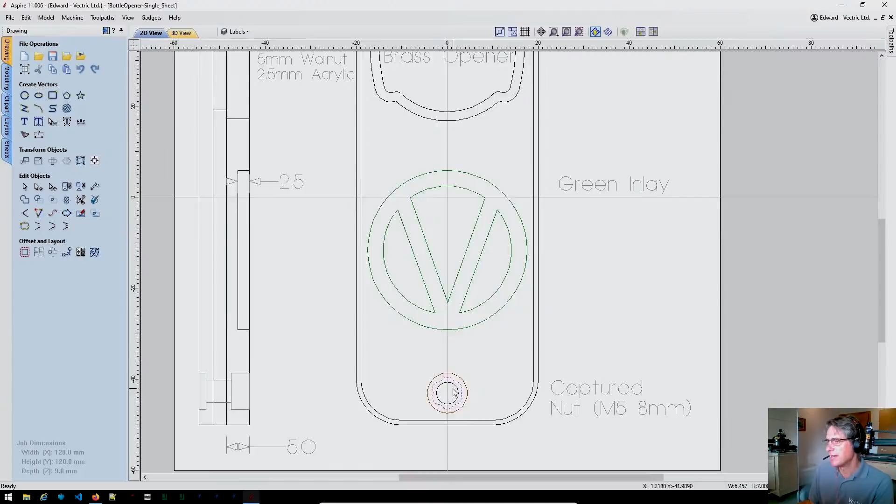The first thing is I've got these profiles here that are filleted versions of the nut geometry, so that there will be a captured nut to fix the 2 layers of wood to the brass inlay, brass insert, I should say. And I can see already that the height of these is 7mm, but on the notes here it says they should be 8mm. Now these are kind of unusual shapes, and I want to resize them all together.

This used to be quite awkward if we used the resizing in the previous version of the software, and you try to resize a group. They would resize around the center of the group. So you can see here that as I select multiple objects, we put a bounding box around all of the selection, not just the individual objects, and they have their own center of rotation, etc., etc.

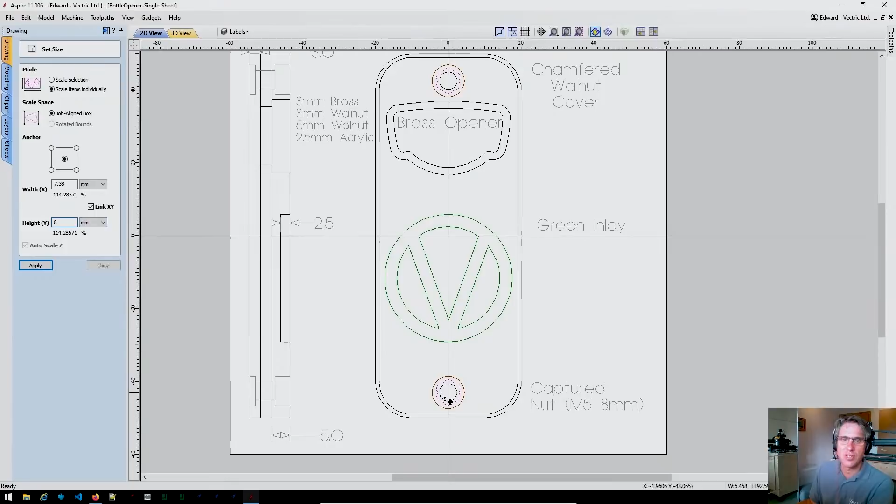So now what we can do is actually ask it to scale the items individually with this setting here. And this forces the software to do the scaling. So in this case, I'm going to increase the height from 7mm to 8mm, but it will do it for each object in the selection individually. So what you should see is that they will stay in place, which is the important thing.

So that allows you to resize selections of objects all over your design simultaneously, but without changing their position, which used to be really difficult to do previously. So it's a small thing, but quite nice. Another small thing that's very nice is I want to change the name of this green inlay to describe actually that's going to be acrylic.

Okay, so I'm just going to edit the text box here, and start typing acrylic. Now I'm a bit of a terrible speller, so I'm not quite sure how to spell acrylic, and you can see here now that we've got the classic red underlining that you should be familiar with from lots of software, because we've added spell checking. And you can see here that it's either sacro-iliac that I'm after or acrylic, so I can now select that.

It supports multiple languages and should work in the usual way. So you'll see the underlining in text whenever there's a potential spelling error. So hopefully that will solve a lot of problems for those of you out there like me who are a little bit challenged on the spelling.

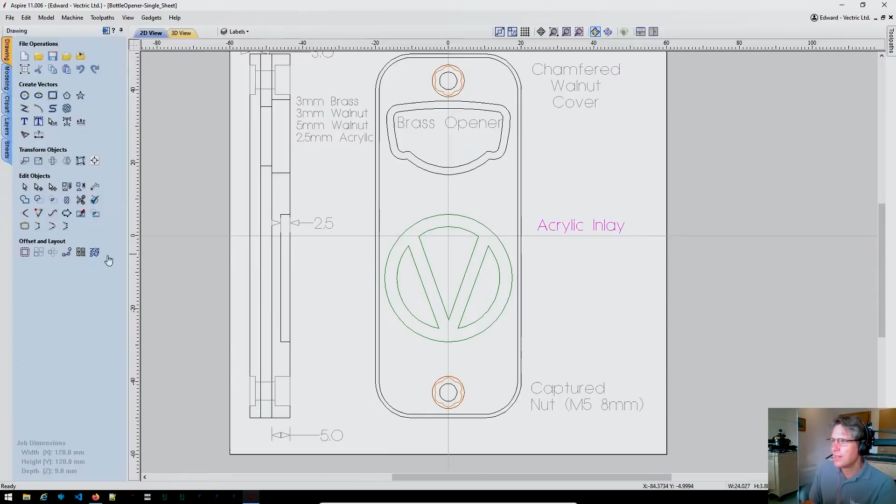The next, again, very simple thing, but really handy just to point out. So I'm going to drop in a little hand-drawn arrow here. And as I start to draw, I come across, and I want to put a line in here. But actually, that's not right. I can use the backspace key.

So when I press the backspace key now, I can go back through my line drawing, a line at a time, to get back to where I need to be. I can even go right back to the beginning of this line drawing. And that will allow me to put in the correct thing that I want to do. So the backspace key just allows you to effectively step back through a freehand line drawing. It's very handy, a small but significant improvement.

Okay, so there's a couple of little quick new things which I hope are all adding to a smoother experience. But the big problem with this file, when we actually look at it, is trying to describe this moderately complicated part in the previous versions of the software involved quite a lot of head scratching, and our main organizational technique was layers. And you can see here that this file has got a lot of layers.

Some of the layers here are automatically generated. This is probably a common thing for those of you who ever import DXF. You will often see that layers come in that are empty because the DXF file generates a layer automatically, whether it's got content on or not. And if you import that DXF into the file, you'll often get dozens of these empty layers, which you have no interest in.

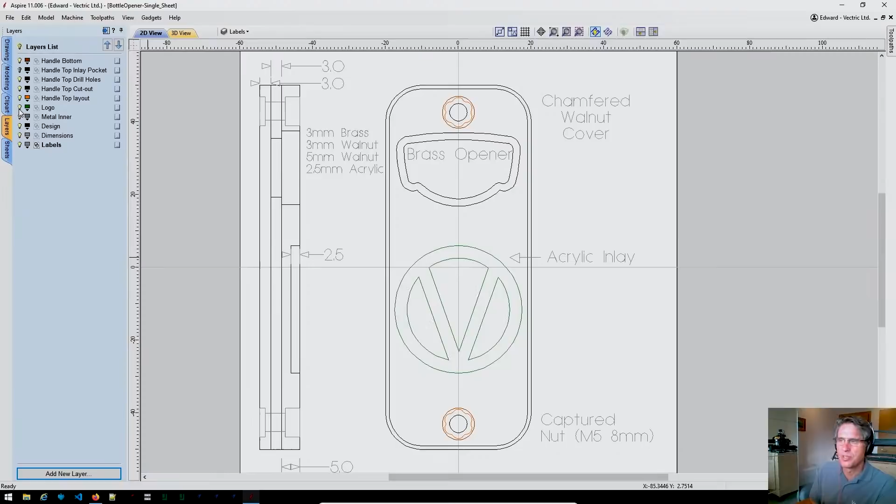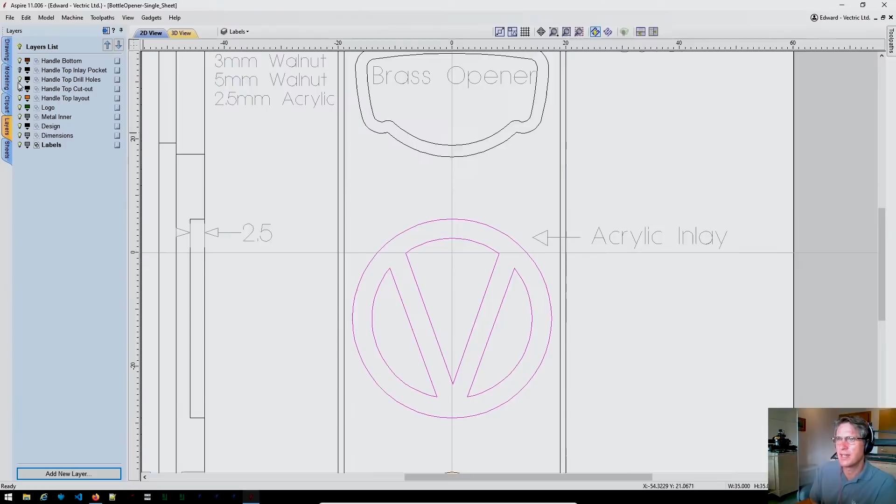We're using them to represent design elements, which we want to keep colored, for example, or independent. But we also need to create layers that hold things like the artwork related to the actual machining. In this case, we've got a filleted version, which is going to form the actual pocket and the actual inlay that we cut. They have to be represented in their own layers, and the whole thing gets quite complicated. So we've got layers that represent machining things, layers that represent design things, and some layers that are just there for structural purposes.

This is really common, because as soon as you have a part that's got to be manufactured from multiple materials, you need to organize your artwork somehow, and that's the only way we've had to do it. But let me now go across to the new version of software, where we have really extended the existing concepts of sheets, which did exist in the context of nesting, taking another whole chunk of organizational infrastructure and expanding it to make it much more useful. Hopefully I can show you that in this next file. So I'll close this one down. Don't need to save it.

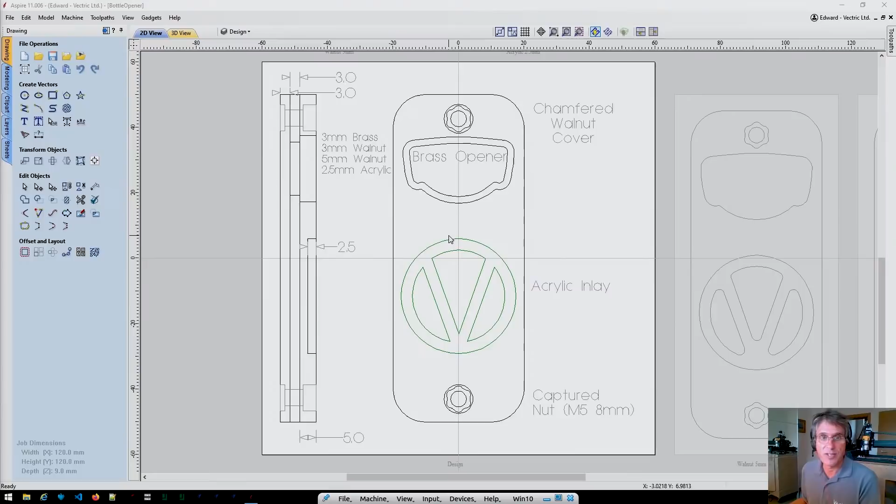Okay, so I have got the new file up here, which started as the same file from 10.5, but now I've restructured and rebuilt it to make use of the new features in 11. In particular, we're going to take a good look at how we can now deal with different materials using the extensions we've made to the Sheets feature. First thing to note is the design space is basically the same. I've kept a place here to do all my design, but over here on the left, you'll see we now have a Sheets tab.

If I zoom out a little bit in the 2D view, you can see that I have been able to create, alongside the design space, actual work areas that represent the true pieces of material from which I'm going to cut the final parts of this job. As we discussed earlier, there's some 2.5mm acrylic, which has got the inlay in it. On the top surface, we're going to use slightly thicker wood so we can drop the inlay into a pocket there. Then we've got the brass inner, which forms the actual mechanically strong part of the bottle opener.

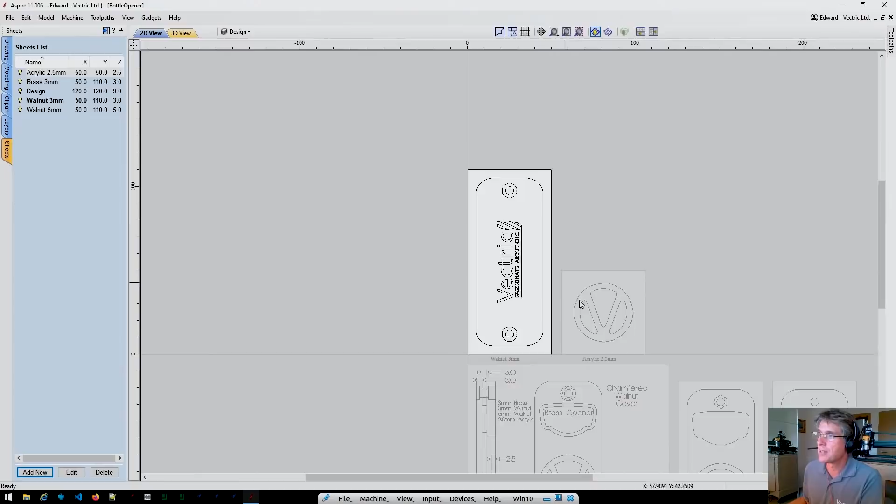And then on the back, it's also another piece of wood, but I've also dropped in a little decorative logo here, which we'll show you in a second, that I'm going to use to laser engrave the back as well. So that's the basic structure of the file now that we can use sheets, right?

So we can break out those things that we had to store as overlapping and fairly complicated layers of data. Anything that specifically now relates to the brass bit, I can move on to the brass sheet. So the cutout passes and things related to that, and the vectors in general that are associated with the mechanics of machining this part as opposed to the design phase can all live on the appropriate part of the file for manufacturing as opposed to design.

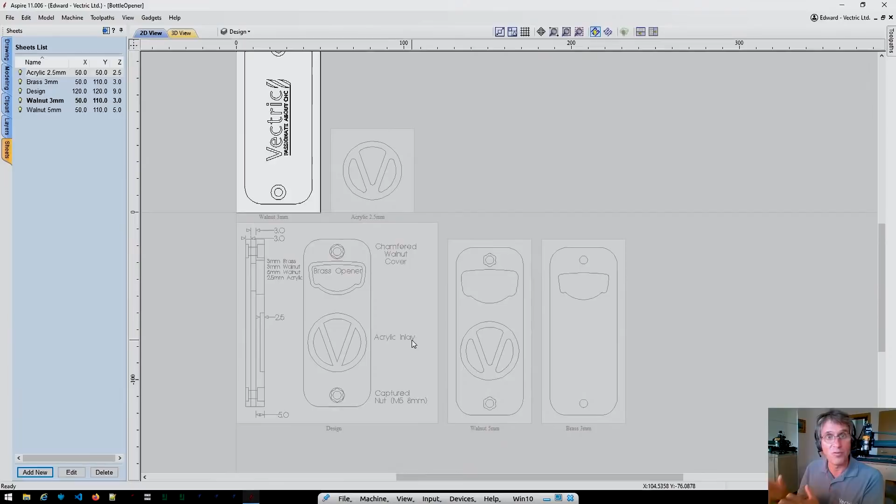One thing as well that's worth pointing out is if I select these sheets, we can move around the sheets fairly easily. We've got various options. I'll show you on the Toolpath selector in a minute that you can do sheet selection from there as well. But basically you can double click anything in the sheets list and that becomes the active sheet, and the active sheet is the white one with the others around it.

You can also just double click in the 2D view to move around your sheets selection, and obviously you can add and edit them from this list here at any point. If we just pick the design one, for example, and I click edit, you can see the settings are fairly familiar for anyone who's used our software before, because it's broadly the set of stuff that used to be associated with the job. But now the job can involve several types of material.

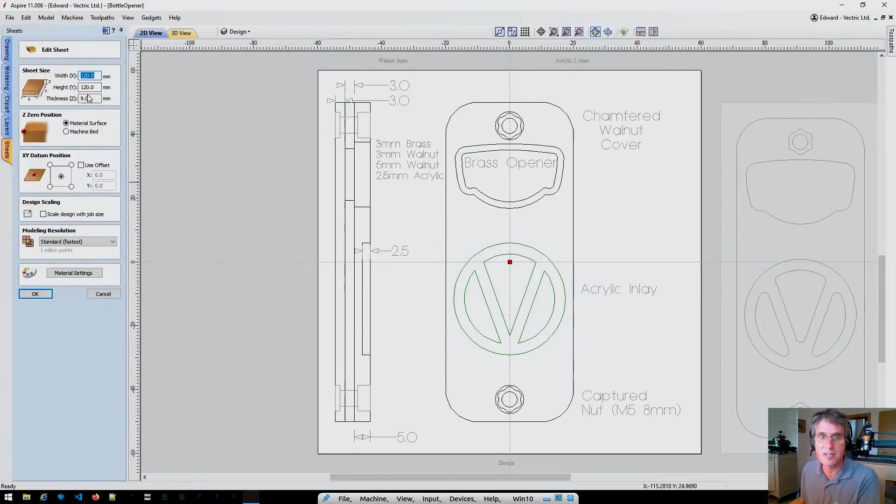So you can see that we can set not only the dimensions here, but also the datum position, and that's significant for a couple of reasons. Most immediately useful, I think, is that when you do have a design space that's separate from your manufacturing space and you're designing something which is essentially symmetrical, you'll often notice that we set the origin in the middle. And this is because it's much easier to design around a central location. You can mirror things left and right, top and bottom, and it's kind of easier to see the balanced layout if you do it around a centered origin.

But this is almost never right for machining, so generally speaking, especially if we're going to do multi-material parts like this, we're going to want to minimize material wastage. We're going to want to tuck the part in the bottom, say, corner of our piece of material, and trying to know the dimensions of the design from a central origin and find that on your machine and make sure you don't run over the edges is more complicated usually than you need. I mean, it might not be the case for a single sign, but for lots of cases, you kind of want your datum to be somewhere from which everything will be up and to the right, say.

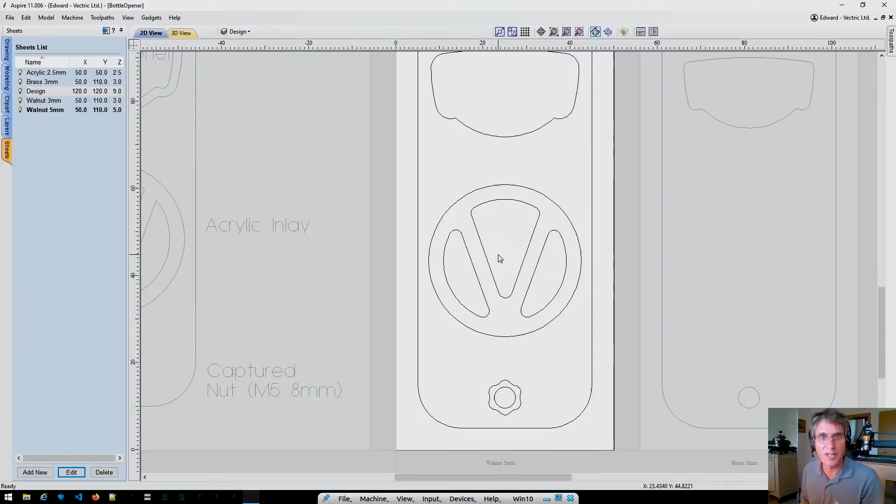And this is now pretty straightforward because our design space can have the origin in the middle, but each of our parts can have its own datum that can be in a completely different location. So here I've moved to the first piece of wood, and you can see the datum for the wood, 0,0, is actually the bottom left corner. And this means that any toolpaths I create on this sheet will be relative to a datum in the bottom left corner. Each sheet can have its own datum, so this gives you a lot of flexibility within one file to handle those complexities of how you want to actually manufacture this part in practice.

Okay, so that's a quick whiz round. So you can see basically the sheets here. Let's now go across and look at the toolpath and see what that can do for us. I'm going to pin those out because we're going to be in there a little bit for the next few minutes. And I also want to show you the layer structure that I've been able to replace the previous file with, and hopefully you can see that it's a lot simpler. So I've really only got a few layers now, the design and logo and labels. So in other words, I've got layers relating to the design elements.

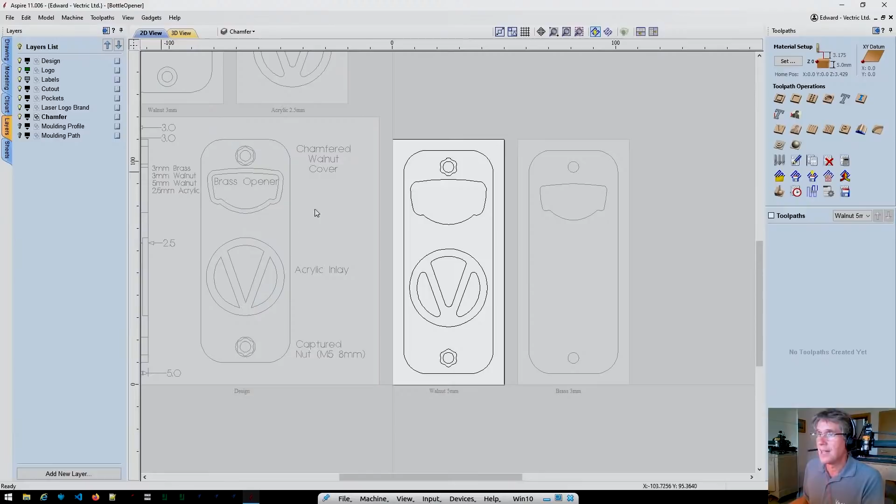And then I've got a series of layers here, cutouts, pockets, the laser brand, and a chamfer, which are all layers where the artwork relates to a particular toolpath strategy that I'm going to apply. Now notice, if I just zoom out so you can see all of the sheets here, and I just turn off the chamfer for a second. Must remember to turn that on again in a minute.

But if I toggle off the cutouts here, you can see that the cutout layer contains artwork on more than one sheet. Okay, so the sheets and layers are completely independent of one another in the latest version of the software. So each sheet can have content from layers. The way I think about this is imagine it's a table laid out where the rows are your sheets and the columns are your layers, and so you can put stuff in any box in that table.

So in other words, some sheets can have content from one or more layers, or no content from that layer, and that allows you to do this process I'm doing here, where we can take all of the geometry associated with the final cutout and have some data on every sheet that's also associated with that layer. Why do you want to do that? Well, if I just turn back on the chamfers as well, it means that I can use the power of the Toolpath templates much more efficiently now for multi-material parts like this.

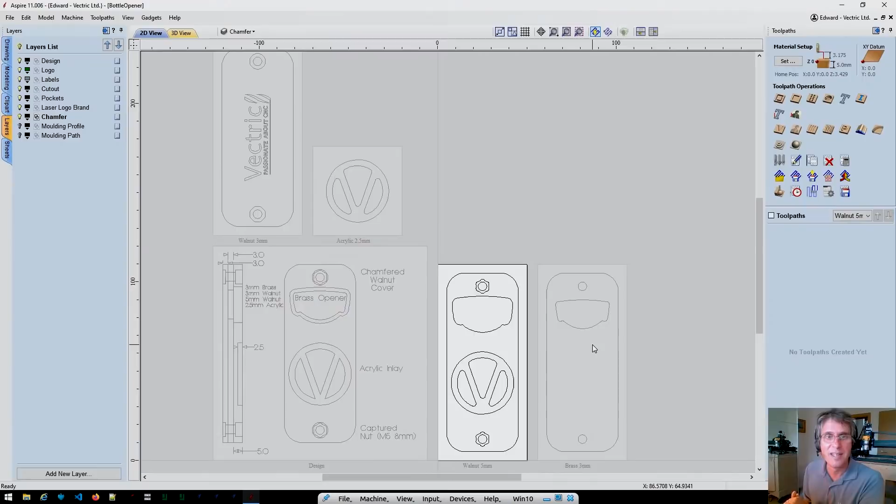If you recall, and hopefully you've had a go with this at various points when you've been using the software, you can create a Toolpath template simply by associating typically the Toolpath strategy with a named layer of geometry. So instead of selecting the thing you want to cut out, you say cut out anything that you find that's on a layer called cutout. And then you can save that and reload it in at any time into a completely new file. And as long as that file has geometry on a layer called cutout, you can calculate that toolpath against it.

And it means all the settings for a particular strategy that you use frequently can be created once and applied across lots and lots of different designs. So that's what I've done here. I'm just going to load in my example, and I've got one here called Pocket, Chamfer and Cut, which does pretty much what it says on the tin. So what it's done there very rapidly is it's gone across each of my sheets. It's looked for each of the toolpath strategies in that file for geometry on that sheet that's on the layer it needs for that particular toolpath strategy, and then it's just applied the toolpath if it can.

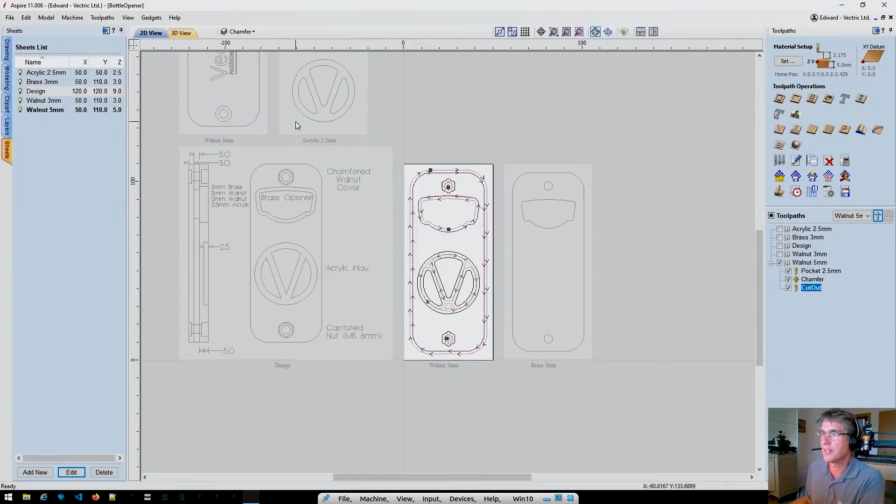You can see that up here we've got a separate selection for sheets, but this just maps all the others. So just for clarity here, you can see as I double click the acrylic, it changes to acrylic up in the list here, and it also changes to acrylic on this drop down. Okay, so these are all in sync. The 2D view, the drop down in the toolpath list, and the sheet list, they're all the same, right? There's just an active sheet at any one moment in time.

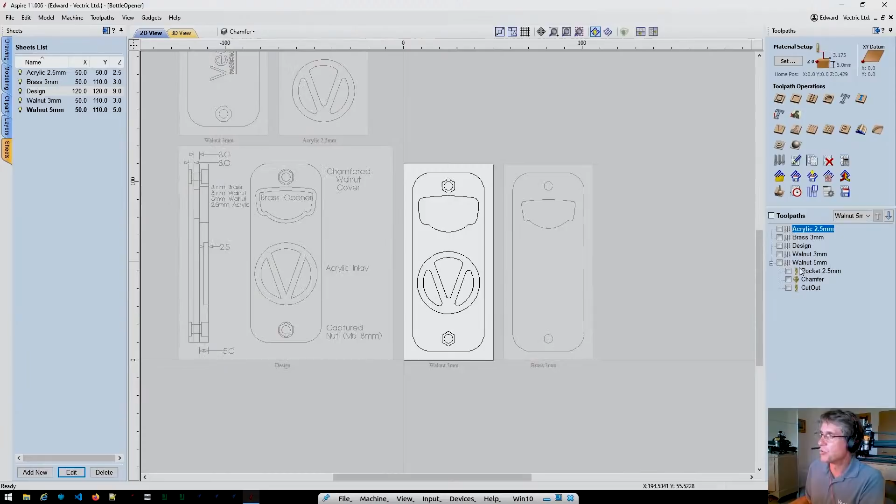What can cause you a bit of confusion is we also have some groups in here. So we put the toolpaths in groups, which you may or may not want to do. The groups themselves don't swap around, but the content will come and go as we look at our design. So let's start, if we go into the preview here, I'm just going to preview this first piece of the job, which is the top layer, which is probably the most complicated single part.

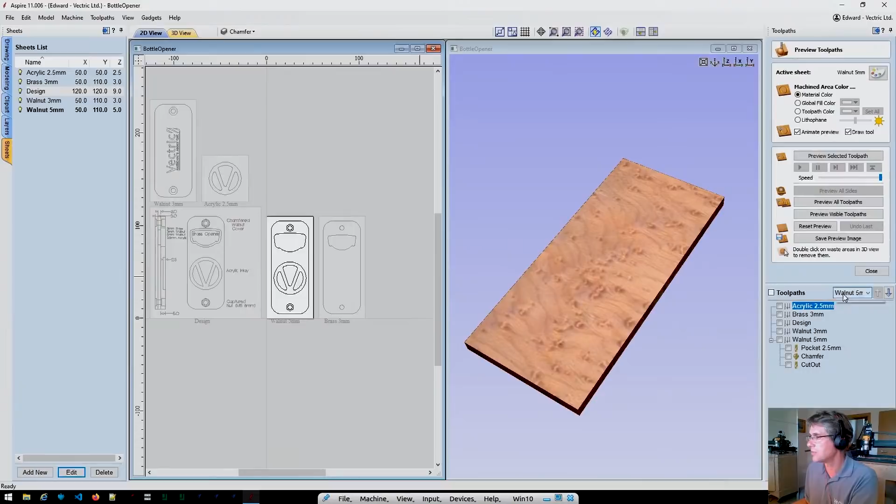Notice that because we've got this in sheets mode now, and in fact, if I page up, this might make life a bit easier for you to see exactly what's going on. This will reflect whatever I've selected in here. So similarly, I can select from here, as we discussed. They're all the same, in sync with one another.

Okay, and when I click preview all toolpaths now, it will actually be all the toolpaths for the selected active sheet. So it's kind of convenient, you can just whiz through all of the toolpaths for that sheet. So remember, all these came in one go. And the reason they came in is because, like I said, the layers here are now providing the artwork for those templates to work relatively automatically from this point on.

And it means I could do a whole series of designs as long as the artwork was on the right layers. These templates would apply. So that's the first thing. While I'm in this, I'm going to just mention one thing about the pocket. This is quite a trivial pocket because it's just for this rather thin inlay. And so I'm only actually using one tool.

But one of the other things that's occurred in version 11 is that we have made the efficiency of rest machining pockets much better. So with quite a bit of analysis and going back to some fairly first principles again, our lead developer on this, Mark, has been able to leverage some really significant improvements in minimizing what the finest tool has to do, if that makes sense.

So we're able to carve more than previously we thought possible by adjusting the strategy a little bit with the bigger and bigger tools. And so what you should find is some fairly significant speed ups in non-trivial examples. So this is obviously quite a simple one, but when you're doing a more sophisticated pocket with 3 or 4 tools, what you should see in 11 is a fairly significant speed up in that case. So I just wanted to mention that.

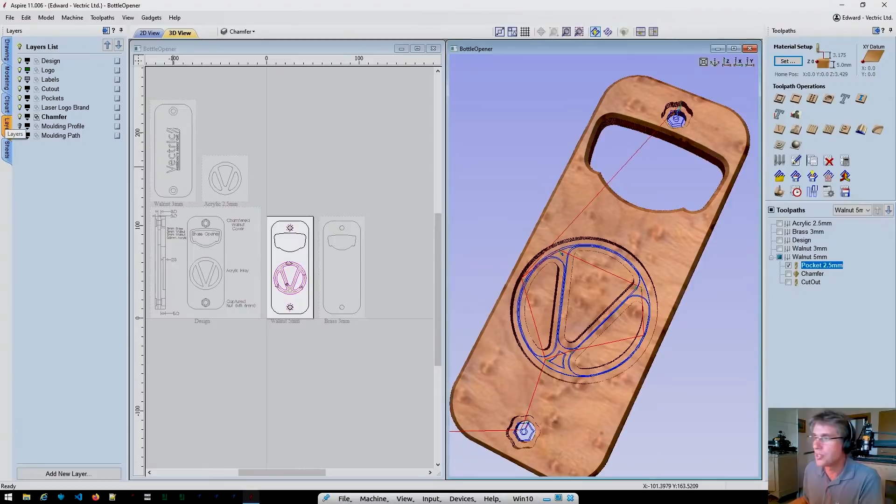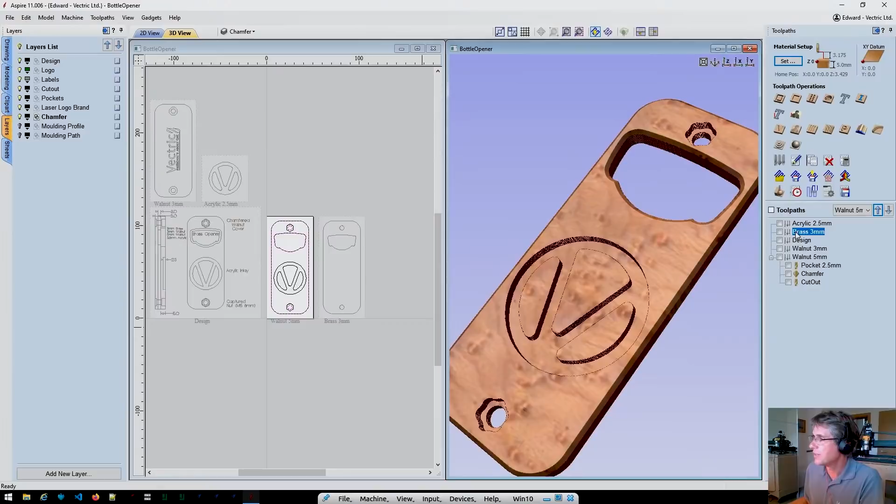What I also want to show you is very quickly now that although we've picked up our toolpath template, okay, so when I come in here, I can see that it's found. So yeah, we'll take this cutout pass here. It's found for a hard wood here that it's going to take 2 passes, and for the thinner brass, in fact, if I move across to the brass and we actually play that one out, you'll see that it's actually still only doing 1 pass through the brass.

Now the reason for that is quite simply that it is using whatever values were associated with the toolpath template. Okay, and the toolpath template only has one set of values for this tool geometry. But you may have already noticed that our tool database has added the ability for us to associate different feeds and speeds to the same tool, relating to different material types.

So in other words, I've used the 1/8 end mill in all of these examples, but the feeds and speeds are not going to be sensibly the same for hardwood or acrylic or brass, right? So how do we fix that problem? Well, what we can do now is we can notice, for example, here that there's going to be one pass through the end mill in acrylic, and that's because it's picked up the hardwood settings that I used to make the template.

And I have to apologize straight away now, because although I'm using Imperial tools, which will be pleasing to some of you, I still really struggle to imagine speeds in inches per minute, which seems to be the default for most people in the CNC world. But I can't imagine what 4 inches per minute looks like in terms of practical movement. So all of my feeds and speeds, I'm afraid, are in millimeters a second, because I can imagine what 1 centimeter a second looks like. Sorry about that. So yes, we've got a weird mismatch.

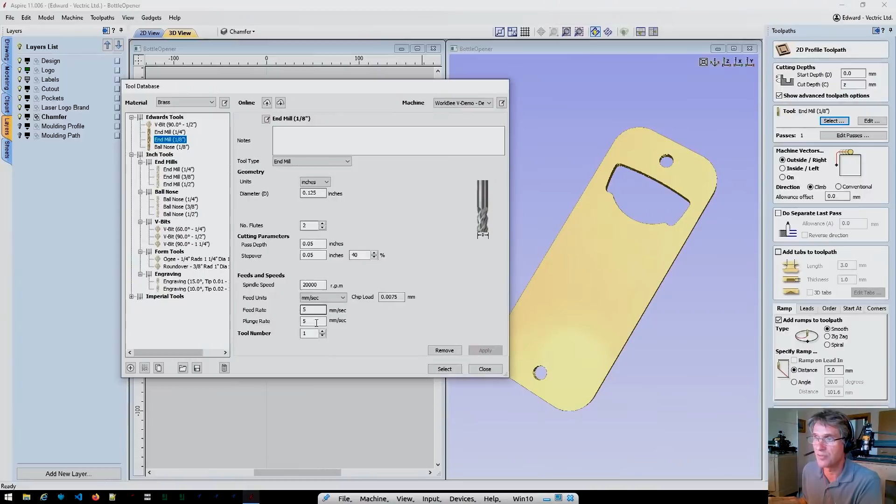And as I select the brass settings, you can see it's halved the plunge and feed rates, and it's also dramatically reduced the pass depth. So I can select that and apply that, and now you can see we've got plenty more passes down. We've also got some ramping in here, which is probably more appropriate as well. So although it's not directly linked to the material that I've described in my sheet, it's much easier for me now manually to match correctly the feeds and speeds that I think are appropriate for this particular part. Okay.

So again, you can do that for the acrylic too. I've created acrylic settings, which will be somewhere in the middle of the brass and the hardwood cutting. Okay, so that's the basics of using the sheets alongside some Toolpath templates.

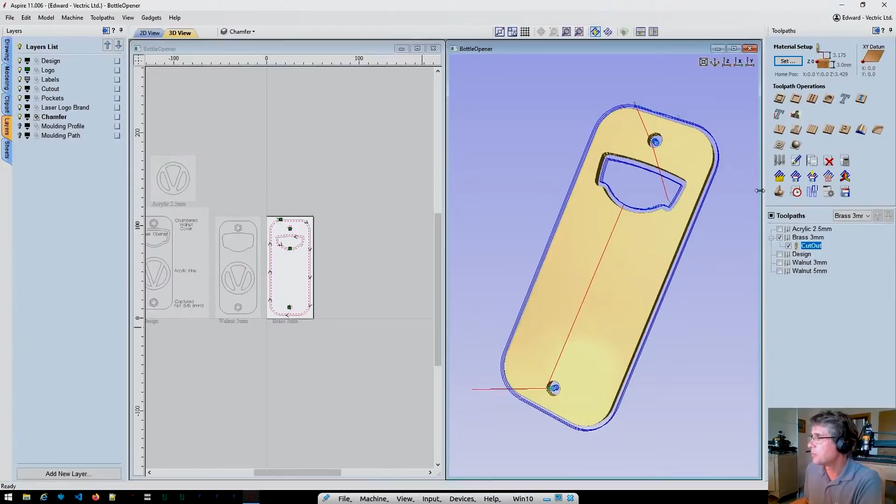I do want to just show you as well one other small change in one specific Toolpath strategy that we've got here. Previously, if I just go back to our walnut top surface, which is the 5mm one here, and we turn that on, what I've got at the moment is a little chamfer toolpath going on here, just to take the edges off. So you probably saw as we were doing this that we come round and finish off the edges of our part here with a nice chamfered edge, just using a V-bit tool.

But let's say I want to do something a little bit more curved, okay, then I can use a ball nose, and we can use the old molding toolpath. So hopefully you've come across molding toolpath. It's been in for a couple of versions now. But previously it was quite difficult to use with a toolpath template. And the reason was, if we look at that toolpath strategy, it requires 2 sorts of vector.

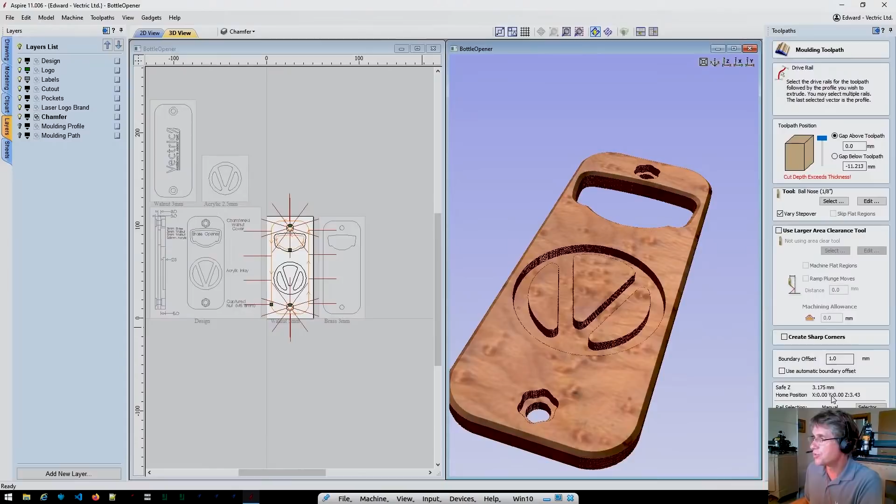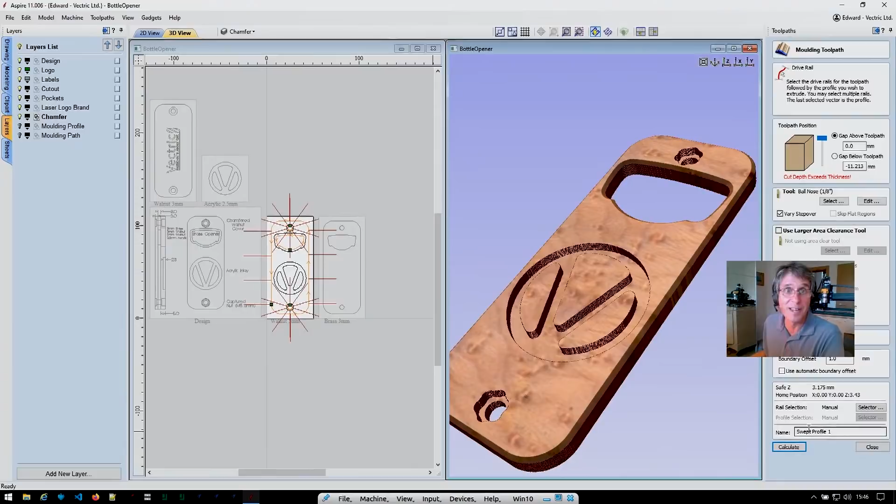It requires a vector for the boundary itself, and if I just move my video out of the way here, you can see at the bottom, it also requires us to choose both the rail, in other words, the boundary that we're going to carve around, and the profile. And that was slightly awkward to do in a Toolpath template, because generally the templates are associated with one vector layer. How do we distinguish between these 2 things? Well, this allows us to select 2 vector layers associated with this strategy.

And what I've got here tucked away on my layers is 2 extra layers, a molding profile and a molding path. So if we just zoom in here and I turn these on, you can see that it's only a little curved profile. But crucially, it's on a layer called molding profile. And then there's a path which is 1mm inside the other one, which is on a layer called molding path. Okay, so the important thing here is that those names match a Toolpath template, which I've previously created.

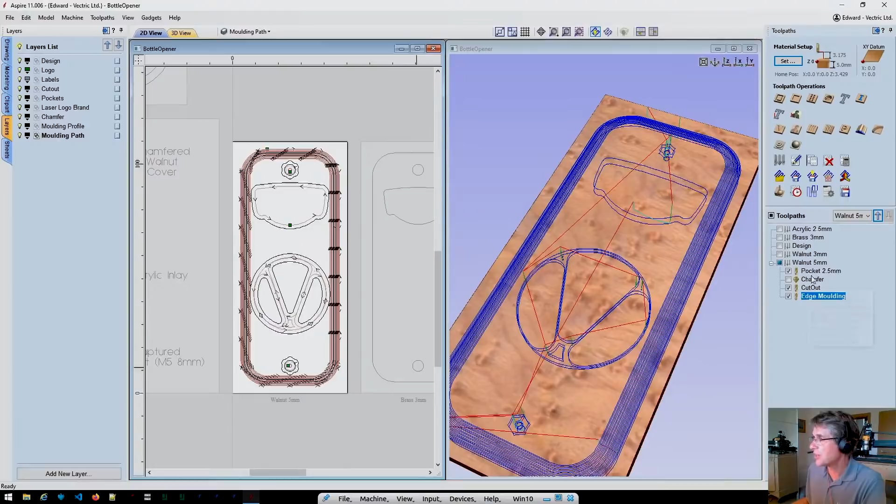So let's open that up, called Edge Molding. And we can apply that. It goes through all the templates, but it only finds the vectors associated with this layer on this particular sheet, right? So it's done that. If we just knock out everything except the chamfer, we don't want to run the chamfer in this case, and I just preview all the visible toolpaths. Now you can see that I've got a little rounded edge on the top surface instead of the V-bit chamfer.

Okay, so the crucial thing here is that with the molding toolpath, we've extended it so that you can use templates with that, just as you would any other toolpath in version 11. And the molding toolpath is very handy because it's the sort of toolpath that you often set up once and want to use broadly the same strategy and the same tool set, but with different profiles, for example. And now you can keep that template handy, and as long as you just put the profile on the same named layer, you can rerun the template, which should improve a lot of things.

Okay, so the last thing on toolpathing directly I want to show you, for those of you using the laser module. The laser module allows us to do hybrid machining. The machine I have behind me, it's a magnetic laser head. So once I've done carving, I can literally just snap magnetically the laser onto the side of that router there, and run over the same material using all the same datums and X, Y, and Z offsets. I can run a laser toolpath completely synchronized with the carving I've just done.

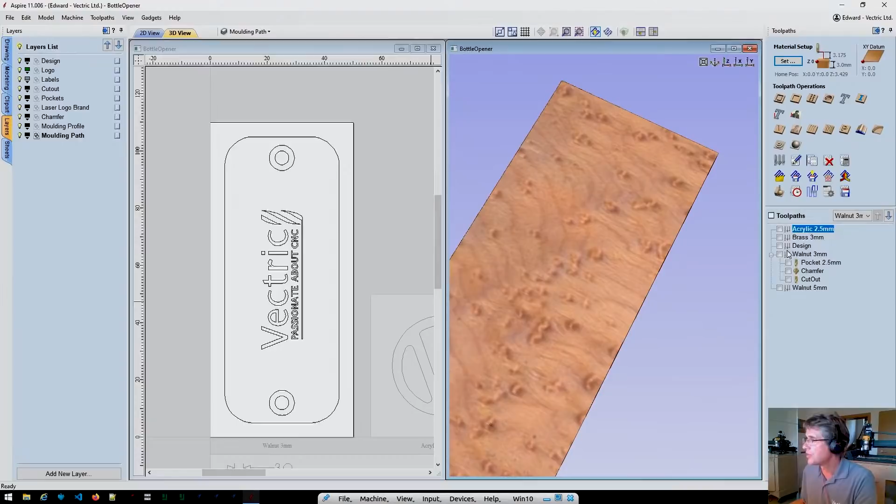So in this case, what I want to do is cut the back of this bottle opener, and then I want to just decorate it with a hatched version of the Vectric logo. So there's been a few changes here. If I just select that and we go into the laser toolpath strategy and I select our vectors here.

Crucially, we were previously just hatch filling individual shapes like this if they were separate. So in other words, it would do the V before the E, and then the C, and then the T, and each one it would do a little tiny hatch and then move the machine. And the reason for this, obviously, is that in CNC world, conventionally with woodcutting, we've always worried about air moves.

So a lot of the last 20 years of my life have been about stopping the machine doing unnecessary plunges, retracts, and air moves, right, and trying to keep the machine cutting as much as possible with a minimum of, if you like, useless middle connections.

With the laser, the world is slightly different, because with the laser, really, what you want to do is get the machine up to speed rastering, and then because there's no plunges or retracts and the laser is instantaneously turned on and off, you just want to keep it moving and just use the laser power settings to make the adjustments, and they're practically instantaneous, so there's no penalty. And in fact, decelerating and accelerating to do individual areas might end up making a much longer toolpath in time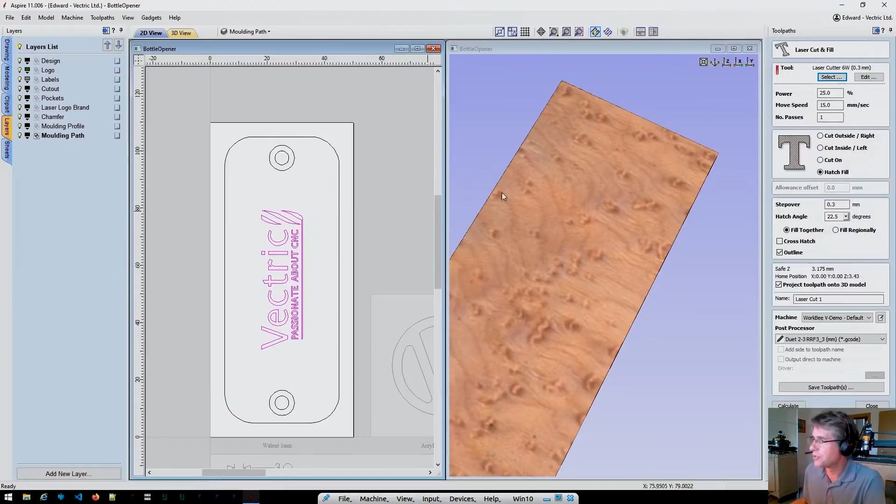than this alternative strategy. So by choosing fill together, I don't need to do anything else, just calculate that, that's it. You can see what we've got here is it rastering constantly, and the purple is laser off and the blue is laser on. And so it just toggles the laser on and off with the minimum number of air moves it needs to finish. There's some more air moves in here because I've also kept outline on, so it comes back and does an outline around the hatching as well, just for good measure.

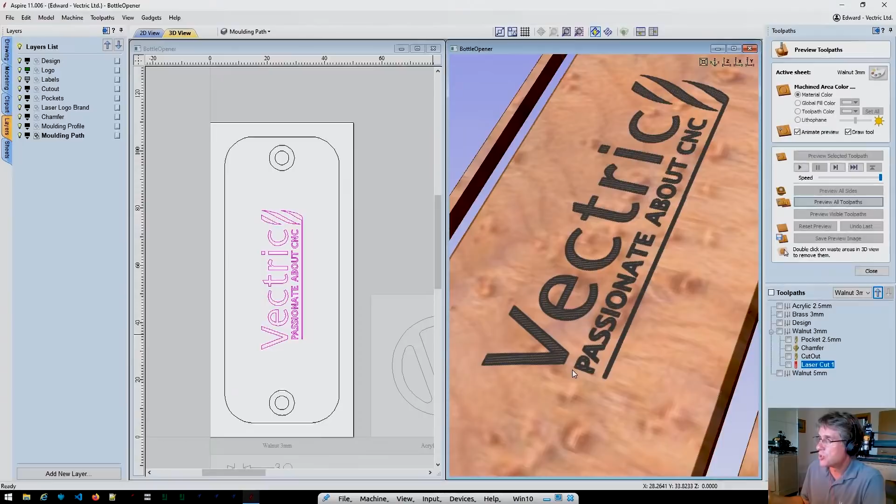In the latest version, we can preview that as well. So I can just reset that, preview all the toolpaths, and then you can see the whole thing. So it's doing a sort of hybrid machining. It's done the cutout, the chamfering, it's dropped in some drill holes, and then it's also added this laser hatch across the top. So we get a really good view of what the finished part is going to look like before we commit. And it's a part obviously made from a hybrid process of machining and lasering over the same material.

So hopefully that's a quick whistle through, and I hope it feels to you like a very coherent set of features which coalesce around doing these slightly more complicated projects. But hopefully also they won't interfere with any of the simple jobs either. So this hopefully makes you keen to try something a little bit more multi-material in the future.

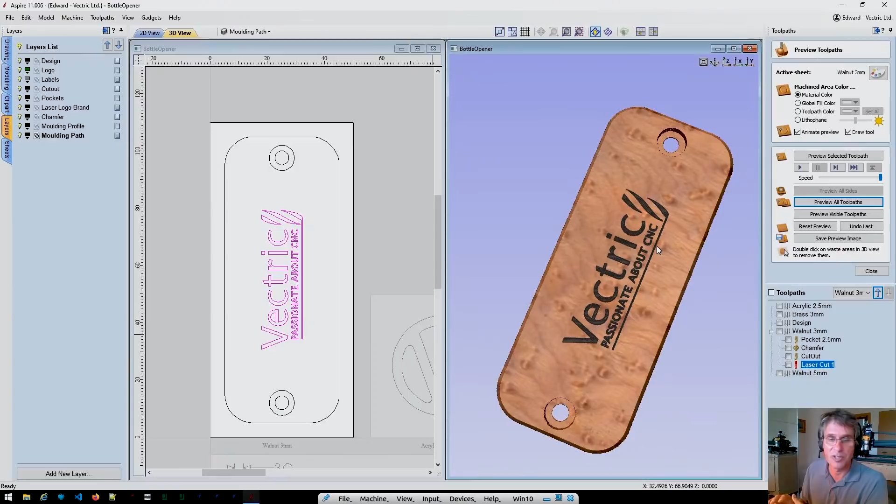So the last thing I want to talk about on this part of the demo before we go to 3D stuff in a second is about machine configuration. Now, the discussions we've had up until now pretty much relate to 2 and 2.5D machining, right? So there's nothing that's not doable in VCarve, and most of what you've seen is doable in Cut 2D, with the exception of some of those decorative toolpath strategies like molding and V-bit carving. But the principles of sheets, the materials in your tool database, and toolpath templates, all those things are in Cut 2D as well. Okay.

And the final thing I want to talk about is machine descriptions. So another big change we've made for 11 is to try and help you manage your machine configurations a little bit more easily. And there's two parts to that. One is, as a new customer, or if you buy a new machine, you should be able to find your machine already defined by us. So there's various ways to look for a machine if you're new to the software. One is to just install one of our offline packages, which you'll be able to download from the portal.

We offer the package download for those people whose machining PC is not connected to the internet, which is entirely sensible, and plenty of you out there are doing it. And so we always bear in mind that our software always works in isolation from the internet if needs be, right? But if you do have an internet connection, obviously we can make things more convenient. We just never make it impossible to use without an internet connection.

But the most convenient way is simply to search your machine online if you've got an internet connection, and you can just pick it and it will come down. When you bring that machine down, we'll also bring in some associated feeds and speeds for the tool database, which broadly match the capabilities of a machine of that type. And off you go, basically. Now, if you've got a custom machine, you can simply add one completely fresh using this button.

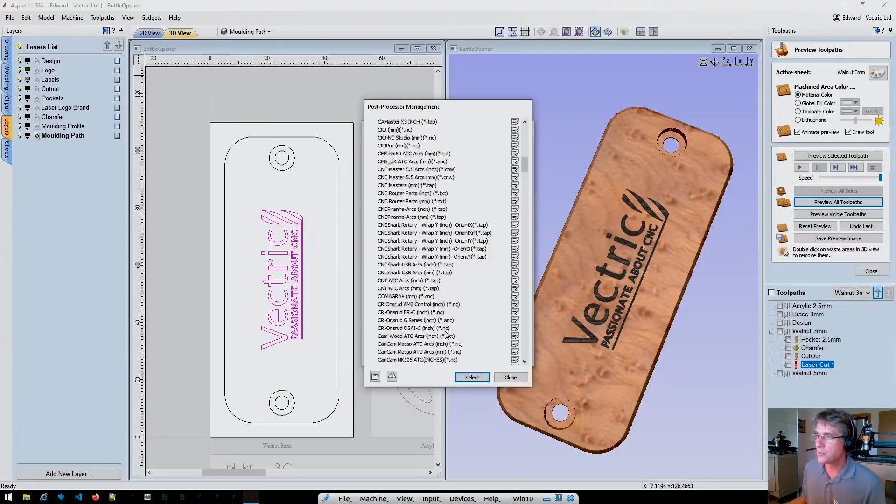For the rest of you, though, you can take any existing post that we have here, and you can customize it. And when you do, you'll get a copy up here for you to edit. And when you want to edit it, you can just get in here. You can open the file location and just edit it with any normal text editor. However, if you want to use one of our posts, there's a little bonus in there, which is that we can keep it up to date for you if there are changes that are appropriate.

So I'm just going to press G. Let's open up. I'm going to add the default G code post to my machine configuration here, and you'll notice here that it's also saying latest but V2.

And that's because we've had some changes to the default G-code post. There's a version 1 and a version 2. If you like, you can just leave it at latest, and that means that whenever we update this post and we're confident that the changes that we've done are tested and safe, you will inherit those changes whenever you synchronize with the cloud up here or with your post processors list.

You don't have to do that, and we understand that in a manufacturing environment, when it works, you don't want to change it, and that is fine, and we've tried very hard to ensure that we never interfere with that. In principle. So if you feel like that, then you can choose here a very specific version, and if you choose that version, we'll never update it. Okay, so you can fix it to a version and leave it there.

All right. So that's a very quick overview. We're going to do much more discussions about post processors, etc., in due course, but that's a quick overview of it. And I think that's it. So this is the sort of the 2D thing. I'm going to open another file now, and we're going to look in a lot more detail about the 3D changes that we've made, which are Aspire specific.

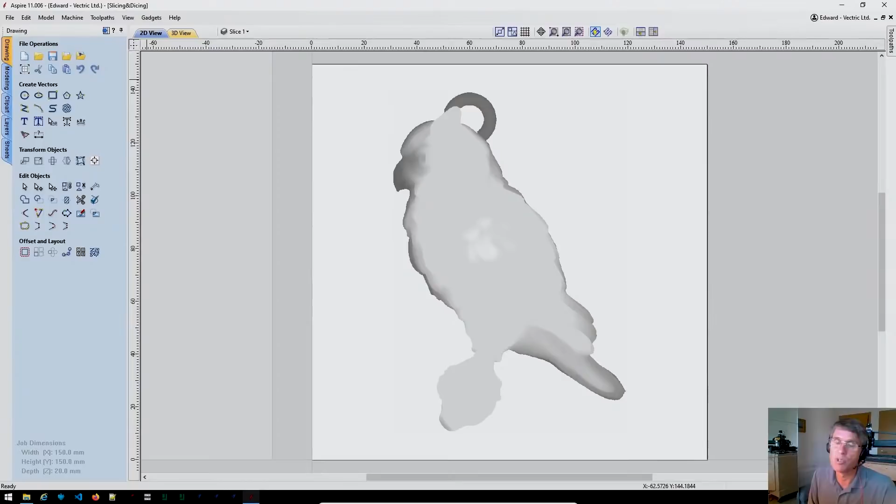Okay, so I've opened up this 3D part now in Aspire. So a lot of what we're going to see now is a sort of Aspire type 3D manipulation work. That's quite typical. I'll just page up so we can see both the 2D and the 3D view here. So I've got a sheet of material here, which again is just my design space at this point. So I've not cared about anything apart from a dimension that's handy for me to lay the parts out in. And then I've imported, using the standard import process, a free 3D model from TurboSquid.

So this was a triangle mesh model downloaded and imported, and all I've done is split it along the midline so that you can see it's a broadly symmetrical model. Got some trouble down here with undercuts, but we won't worry about that. We're just going to make a relatively crude 2 parts of this model. And what I'd like to do is decorate it a little bit more, because it's a little bit flat on its feathers.

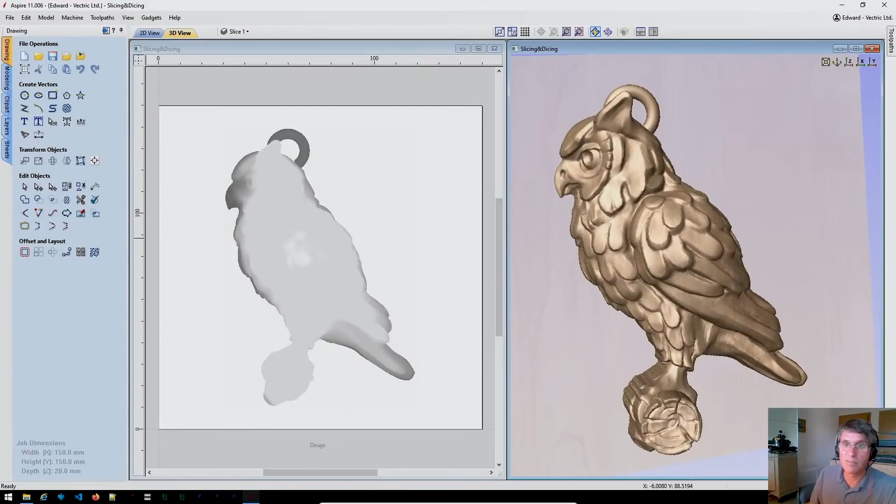I think it's a scan of a real key ring of some sort, but the feathers lack a bit of texture, and because we're going to blow it up into a bigger size when we cut this, you can see that it's a few inches across now. We probably would find that a little bit plain, so I'm going to demonstrate how we can improve that. So first things first, let's add some feather texture here using the new features. So I'm going to create a component first, which we're going to use as a brush to sculpt over the surface.

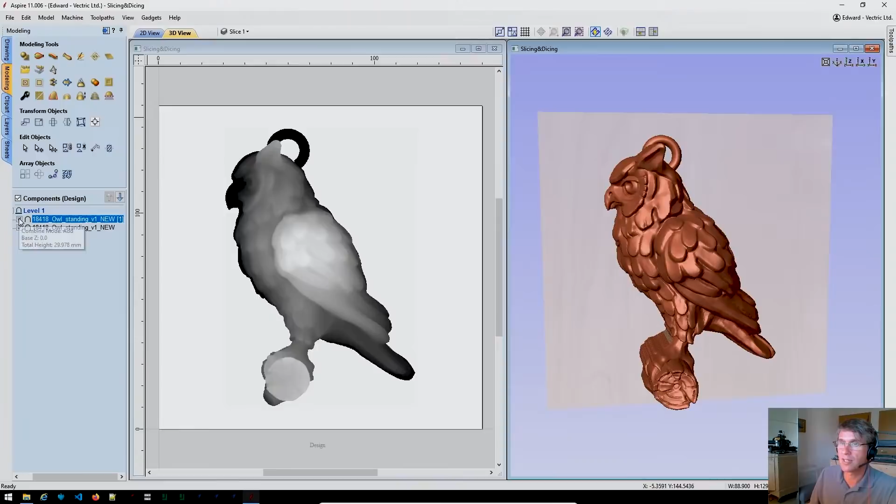Okay, so let's just have a look at our modeling layout. So we just brought in this model. Like I say, that's just a straightforward import. So before I go any further, I'm going to copy that so that we have a spare in case of trouble. In fact, I'm going to just use duplicate. That'd be more efficient. And then this is the one that we're going to sculpt on. But to start with, I'm going to create my brush. And to do that, I'm going to need to create a little bit of artwork.

So I'm just going to create a boundary, not a circle, in fact, but an ellipse. And I'm going to align it vertically on the model, because it turns out that later on, as we use this brush, it's important that it's vertically aligned, and I'll explain that in a second. And I want to grow that shape with a texture across it. Now, ideally, I'd like the texture to be a little bit zigzaggy, so that it forms some kind of shape there. I don't even care about the orientation, because it's just for an effect that I'm after.

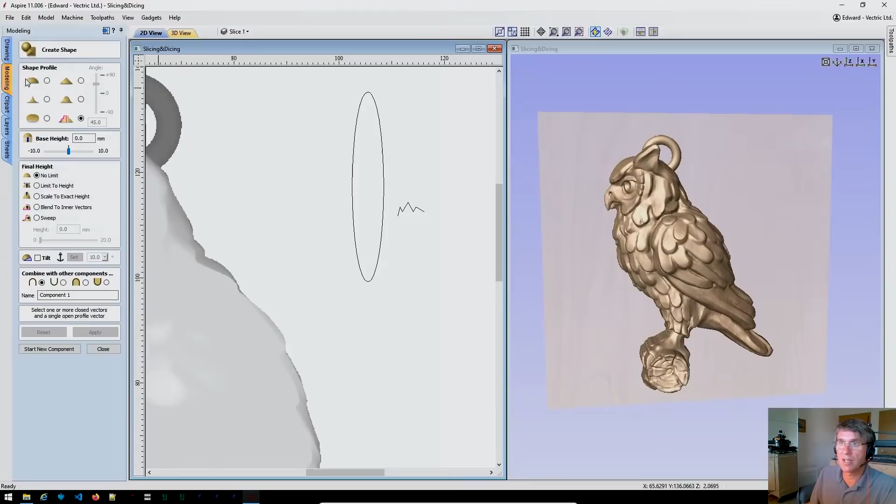In the modeling now, if I go to create a shape from Vector Outlines in version 11, you'll see that the modeling tool in version 11 has had quite an overhaul. And in particular, there's a brand new modeling profile type here. So typically, we've always had these curves and prefixed profile shapes, but now you can also just choose an arbitrary shape, and that's what we're going to do.

So we're going to choose the boundary like we always would, but with this option selected, I can also select my custom profile, and once I've got that selected, I can do all the usual things, but basically let's just apply that and have a look.

And you can see up here that what we've done is kind of just created a 3D shape made up of that profile across the surface of the boundary that we selected. Doesn't need to be very clever. You're going to see in a minute that the whole system is extremely forgiving, which is good for me.

I'm still probably going to make a hash of it because I've only got a mouse and I'm not very artistically talented, but we'll do our best for you. Luckily for me, I'm confident over the next 3 days, loads of people are going to be doing much better sculpting work with the new tools than me. So it's just to demonstrate the principle.

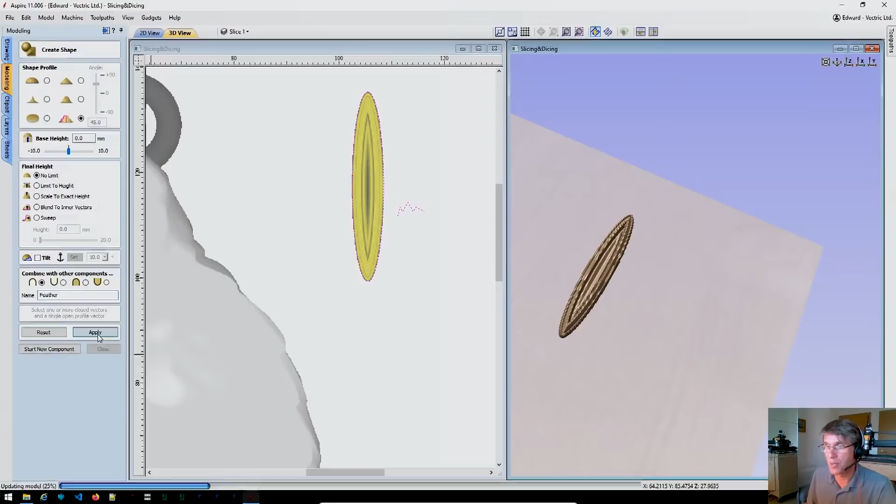So I apply that. So I've just created effectively a component called feather. That's all we've done here. And what I'm going to do with that feather is I'm going to use the new option here to save it as a sculpting brush. So I just right click, choose that. It opens up my sculpting brushes folder.

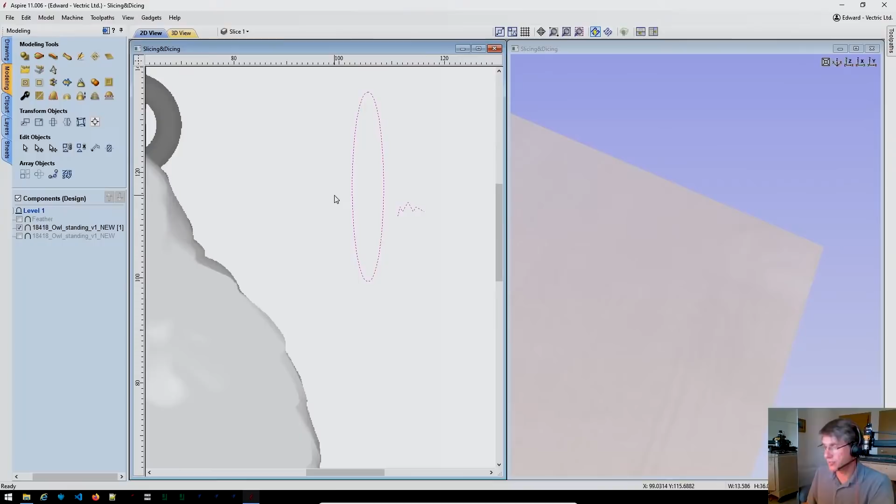You can see I've already done one, but just to prove I'm not entirely sleight of hand, I'll overwrite that one. And then we can actually hide that. We don't need that anymore because it's saved to disk. And in fact, I can get rid of the artwork as well. And now I can come back and select the owl, which we were going to sculpt over the surface of. And in fact, I'll go full screen with the 3D view for this bit.

Okay, so my plan is to sculpt down the wing and the body a little bit with that new feather shape using the sculpting tool. When I open that, you can see if I choose add here, one of the options I can do, rather than as previously just have a kind of a smooth paintbrushy shape, I can actually pick any arbitrary shape I like, defined as any of those 3D clipart that I've saved. So any relief file that you model, you can now start to use as a brush.

So I'm going to load in my feather. Okay, and it appears there, a little preview of it. And I can see it on the screen here. If I zoom in a little bit, scale it up, you can see that there's my little shadowy representation of it. What I'm going to do though is I don't want to sculpt with it always being vertical. I want it to flow along the body shape of the owl.

So I'm going to use this option to dynamically rotate it, and I'm going to merge it in as it goes. Because I've got dynamic rotation on now, it's telling me as I drag the mouse, it's going to turn this model where that arrow is showing, and the arrow will always be pointed in the direction of travel of my sculpting either tablet pen or mouse in my case. And that's fine, right? That's what I want it to do.

But I also know that I'm going to start here, not by dragging upwards, I'm going to start by dragging downwards. So if I press the R key down, I can actually reorientate this brush so it's roughly in the right direction for where I want to start. And then this is really it. I just need to drag this tool. And you can see that as I move around, it automatically is placing the copies of the brush in the orientation that I'm moving, so that I get this effect.

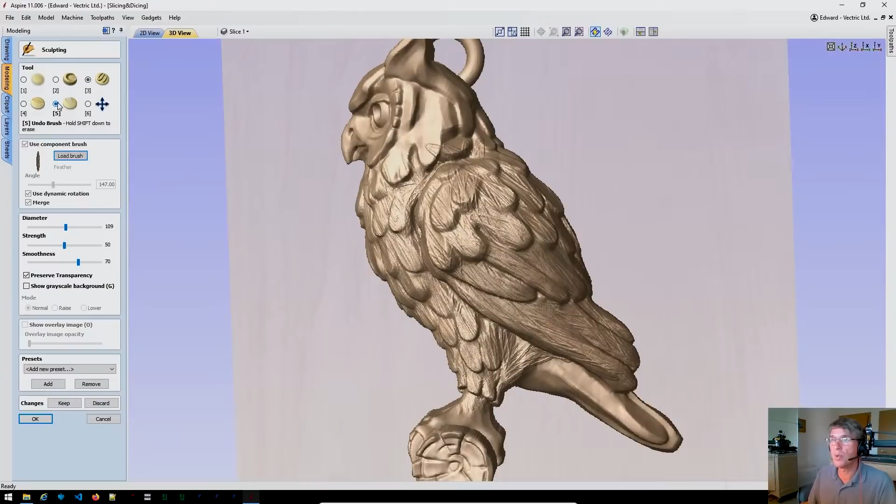Okay, now I've overrun a little bit there, but luckily for me, my favorite and most used tool is the undo brush, so I can clean up my bad habits a little bit around here and a little bit across the foot there. But now you can get the idea, at least, that what I've been able to do here is add a texture very trivially that also flows broadly in line with the organic shape of the model. And again, often if you're importing 3D mesh files, it's these textured surfaces that are lacking.

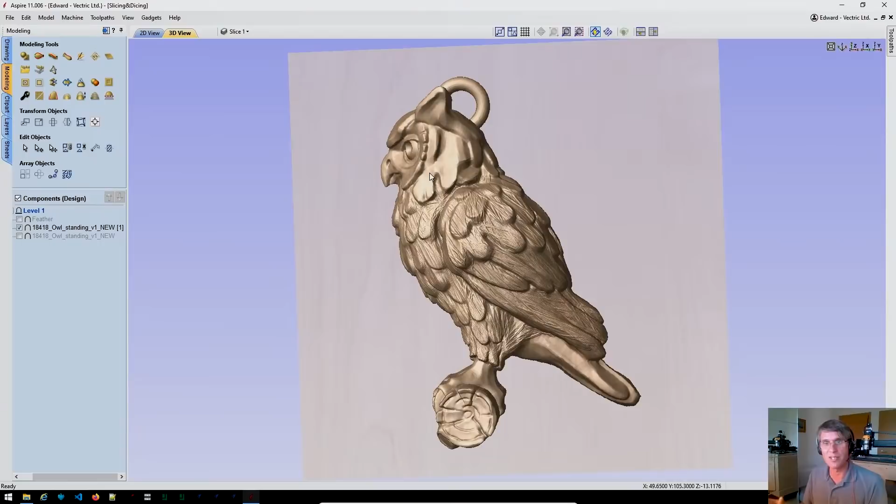A lot of 3D models provided in the model stores and stuff are really designed for rendering, and so they use imagery and a lot of fakery to produce detail. And ultimately, when we machine, we still need that detail physically in the model. So one of the things that's quite common when you import a model is also to add a bit more extra detail like this. I think most of you will have experienced that. Okay, so that's my extended model.

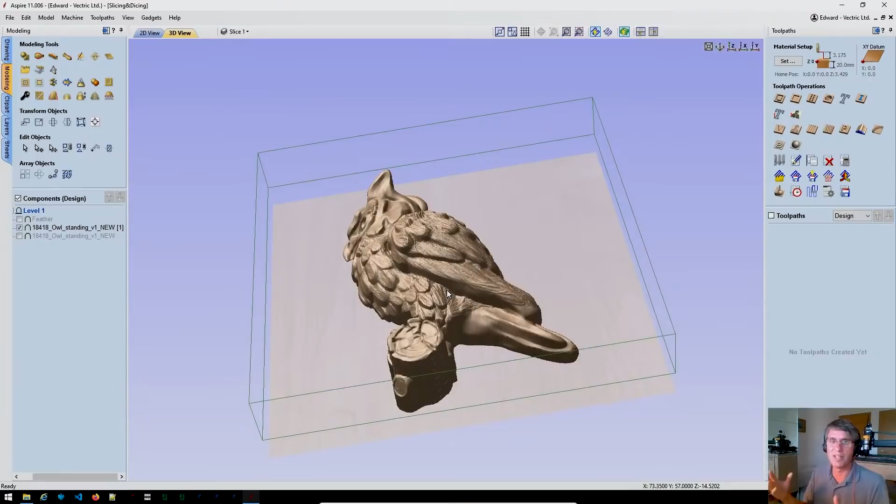Now let's think about how we're actually going to manufacture it. Okay, so first things first, let's pin out my toolpath, because we're going to move to that kind of mode. And I'm going to turn on the material block and experience the first problem. So in my design space, I didn't really care about material, so it's kind of not going to fit in the design space. But anyway, I don't intend to cut this like this. I intend to cut this laid out into a sheet.

So what I've done is actually created a sheet already, which really represents what I'm actually going to use to cut the material here. Okay, and what I want to do is move the parts into this and actually lay them out separately as a manufacturing space. And you can see I'm intending for it to be a 20mm MDF, so just under an inch thick MDF sheet. It's about 300mm by 300mm, so it's a pretty large sheet, but it fits on the machine behind me, and typical of the sort of material that's actually available to us.

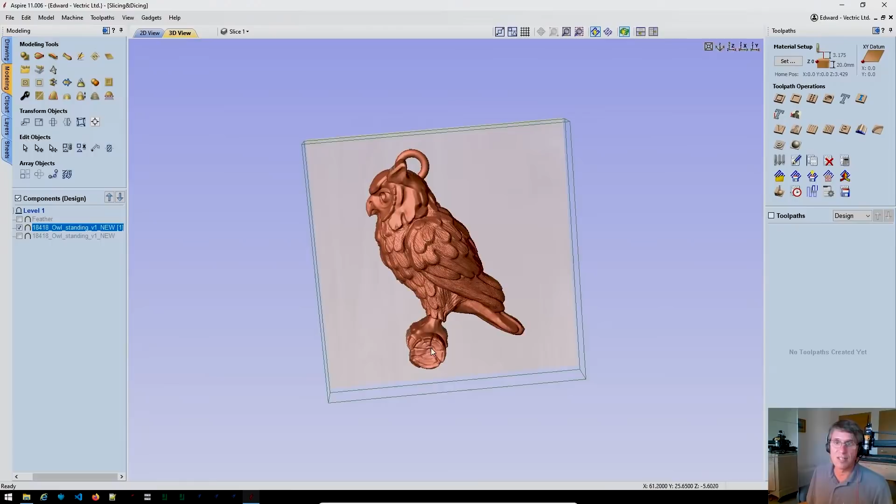This model, though, unfortunately, is 30+mm, so well over an inch and getting on for an inch and a half thick. So we need to sort that out. And the way we would typically do that is to slice the model according to the thickness of the material that we're going to cut it in. So let's go and have a look at that process. I'm going to go to the relief slicing tool. And hopefully you can see here that this has had a massive overhaul for 11. It's a really much more visually and interactively usable tool.

And the reason we had to do it like that is because although I say I want to slice this to fit it into 20mm sheets, the reality is as well, you need to take into account the shape that you're slicing. And I know, for example, here that I've got a 31mm, getting on 30mm model, and I've got to fit it into 20mm thick sheets. So I can get away with two 15mm slices, right? But actually those 15mm slices might not be very good in terms of the shape here. They might cause a bit of the beak to be separated from the rest of the model, or some of the tail to be included when we don't want it.

So you can obviously still do all the same things that you used to do before. So you can adjust the slices here and just have it work out those slices. And so that's the exact halfway point for us, for example. But see what I mean? This area here is a little bit awkward, isn't it? Right, so it's going to leave a gap there, and this will be a fragile piece. So actually, I'd rather go a little bit deeper for one of these slices.

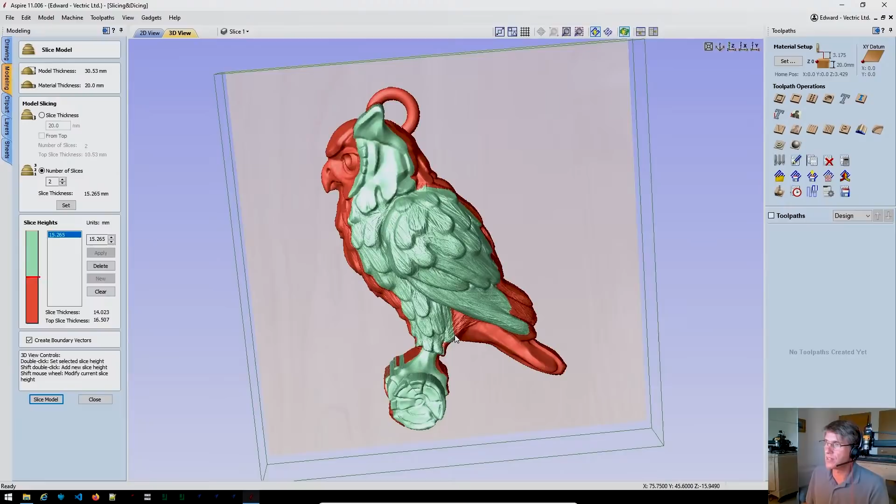Yeah. So what I'm doing now is I'm just double clicking directly on the model. And the slice, therefore, is picking up the shape of the model. And now I can see this is a much more coherent slice for me to take. It's going to be strong, there's no gaps, and it doesn't cause any awkward islands. So that's the value of that. And I can see here that the other slice thickness is going to be 17. So they're both going to fit in a 20mm block. But because of the graphical interactivity now, I can make sure that it's appropriate for the actual shape I am slicing. So let's slice that.

And I get the two parts. Can't see much at the moment, but they do exist. There's one and there's the other, but they're lying on top of each other. So let's go back to the 2D view now to the next stage here. Oh, I've created vectors. I didn't really need the vectors actually for this demo, but it's another thing that we can do now. In a minute, I'm going to need to find boundary vectors for these parts.

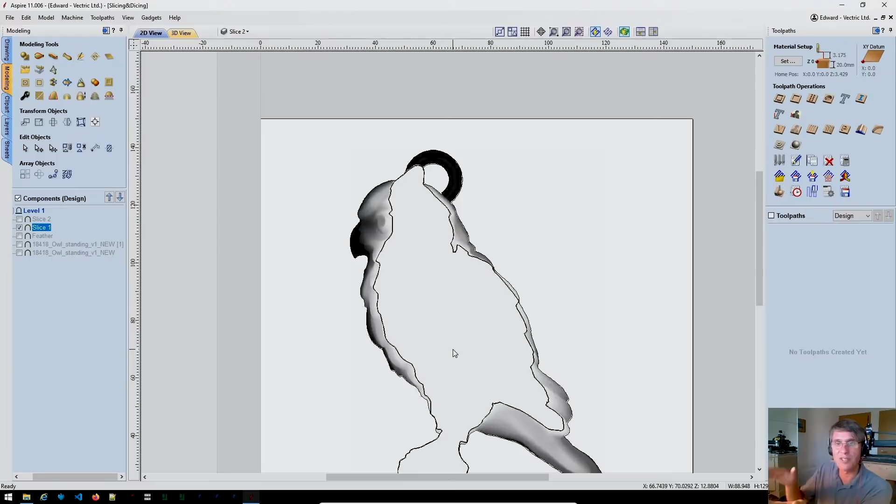You've always been able to find the external boundary vector very easily in Aspire, but when you slice, you kind of also have an internal boundary, which is only ever going to be a place on which the next slice rests. So quite often it's useful, in fact, to offset that in and hollow out the shape that you're carving. You might even be able to put some smaller parts inside bigger parts, which only need to be the frame edge.

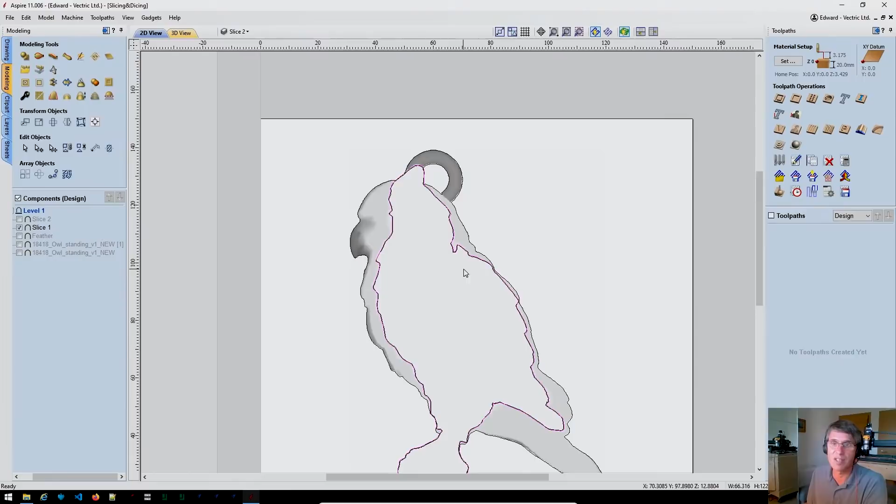That boundary was previously hard to find. So what we've done is basically build it into the slicing tool now. So if you want, you can get those vector boundaries as part of the slicing process, and then that's much more helpful in trying to keep everything together and to find the inner bits of material that you can get rid of, which are not part of the important parts of the model. Right, I don't need them for this demo, but I'll point it out because it's a new feature.

What I do want to do for this demo though, is I want to move these parts across onto my MDF sheet. Because remember, the slices are now the manufacturing parts. So from my perspective, I think they should go onto the manufacturing sheet. So that's slice 1, and this is slice 2. So just moving them to the MDF sheet. And they're on top of each other at the moment, but in fact I just want to space them out because we want to cut the parts not one on top of the other but next to one another.

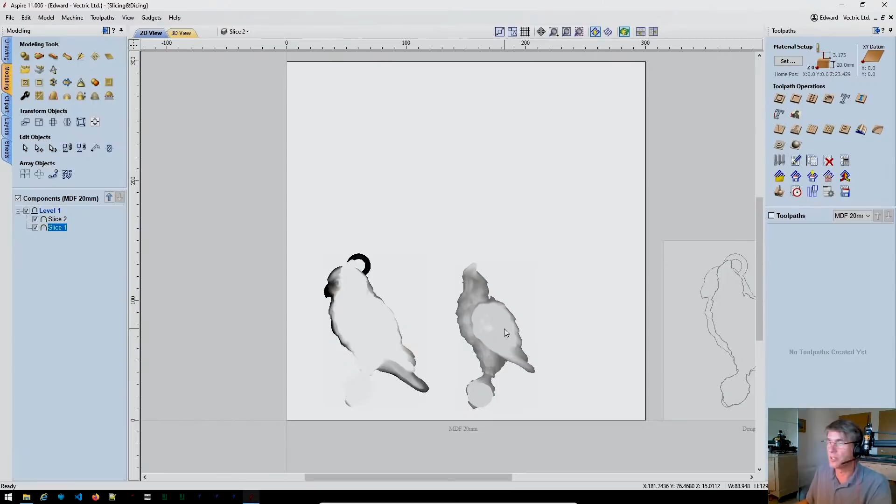And remember, I need two halves of this model, so I need a mirror image of these two parts for the other half. So I'm going to select those, Control C, Control V to copy them, drag that up there, and I'm just going to press H, and that just flips those over to form the mirror images for the other half of the part.

Got quite a big piece of material here. I feel like we might be able to fit more parts in. I could maybe be able to cut 2 owls here. So what I'm going to do is use the nesting tool directly on the component parts to see what I can fit into this piece of material.

Excuse me. I really keep meaning to go and get a glass of water because I'm talking too much.

Right. So nesting. Let's select these parts. And you can see all the usual nesting stuff is here. There's a little bit of extra stuff to do with sheets, which somebody will cover, I'm sure, in the next day or two. But basically, because I've already moved the parts onto my manufacturing sheet, I'm just going to nest the things onto the active sheet from the active sheet, right? And because of that as well, I'm going to remove the original parts, because the original parts effectively now exist on the design space, and I can always reproduce new slices if I need to. So this is purely about the manufacturing layout that I want for the MDF sheet on my machine.

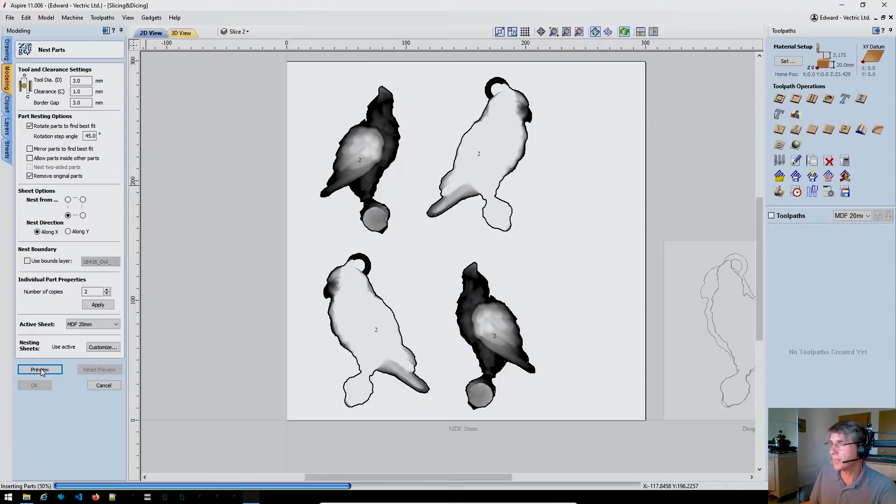So I'm going to make 2 copies of everything. Let's apply that. I know I'm going to cut this with an 1/8 inch tool ultimately, so I'm going to allow about 3mm around the edge and a bit of extra clearance. Let's preview that. Okay, so you can see straight away that that has now nested those parts very nicely for me, and I've still got a bit of space. Might even get another half a bird in there, don't know. But for now, let's go with that.

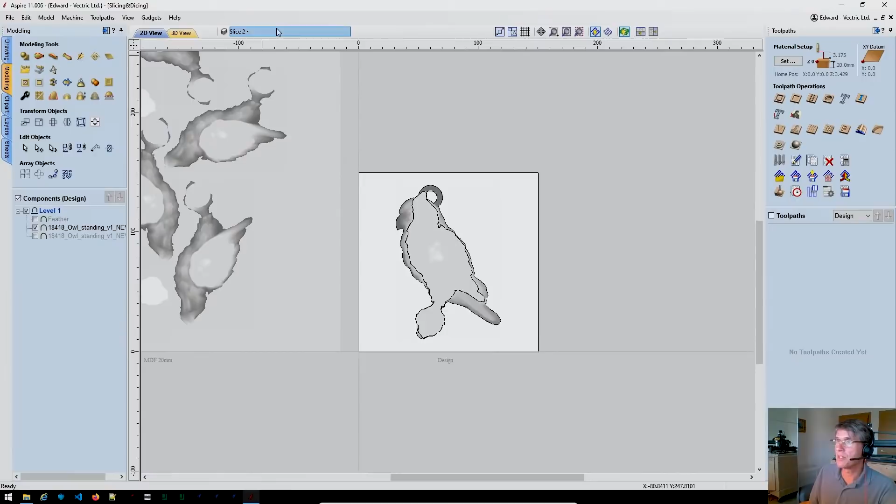And you can see, obviously my design space is still here, right, with the original outline. So that's pretty cool, I think, if we just remind ourselves. So I can now just hop around these two elements, all in the same job, and obviously closely related, but separate parts, if you like, of the CNC process, and now being kept nicely separated in a way that I think hopefully will help everyone. So there's the parts for machining.

Before we go any further, we're going to need some boundaries for those. So let's select those and use the traditional boundary creation there. And now what I want to do is show you a little bit of enhancement to the 3D machining. In fact, a really significant enhancement to one of the machining strategies, but I will mention the roughing as well.

So I'm not going to use the roughing in this demo, but we have improved the roughing such that the orientation of raster roughing toolpaths is now selectable, and also it's got some significant improvements in the coverage that it does when it's roughing.

Okay, so there's some algorithmic changes there behind the scenes as well, which should all go to improve toolpath optimization. But where we've made some big UI changes, which are worth pointing out and a bit more demoable directly to you, are the finish machining, where we've essentially added the idea of rest machining now for 3D finishing.

So just as in 2D pockets and 2D area clearance, we can now stack up tools of progressively finer geometry, but we will only use the finer geometry in the areas that we've missed in the previous passes with the larger tool geometry. So for big jobs like this, it means that you can save an awful lot of time by hogging out the majority of the material with your large tool and only coming back and picking out the detailed areas that you need to with a finer tool.

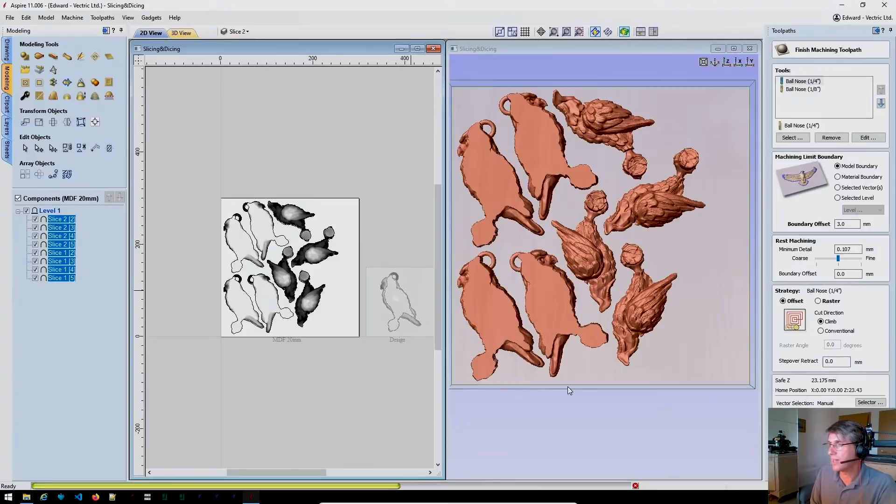And you can also have your smaller tool overrun the individual rest machining boundaries as well by a boundary offset if you want them just to clean up the boundary between the bigger and the smaller tool. In our case, we're going to leave that alone. We're going to leave everything pretty much default, and I'm just going to run that. It takes a little time because it's doing quite a lot of analytics effectively of the shapes, but still you can see it's a fairly big sheet, quite complicated parts, and it's still pretty rapid, even running as I am on a virtual machine, so it's not even running directly on the hardware.

Okay, so let's have a look. So what we've got, 2 bits here. I'll show you the roughing bit first. So it's brought in the big tool, it's come over the surface. As you can see, it's just a sort of offset strategy. You can choose offset or raster strategy. What I've done is offset the bigger tool, and then I've kind of come back in and rastered with the smaller tool, in fact, no, I've offset both, haven't I? But you can choose to do different strategies between the two.

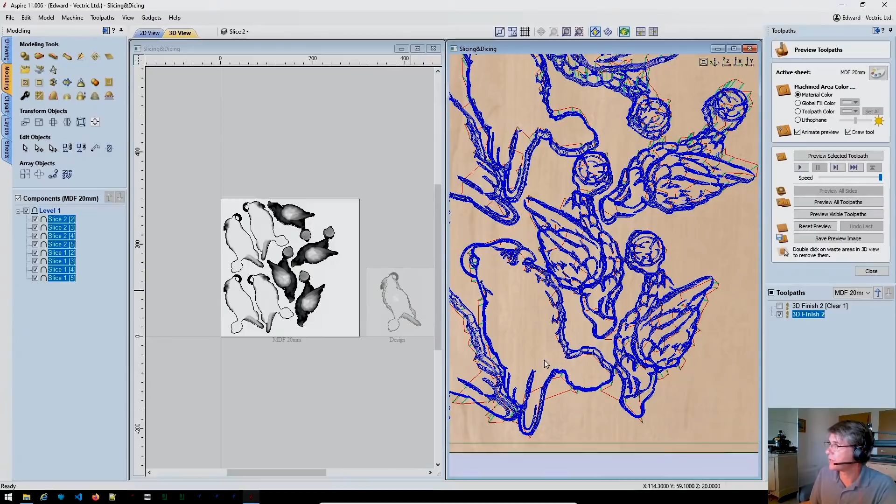But crucially here, what I'm hoping you can see is that the final smaller tool is only being used on very, very small areas, so that you can get a much faster result and hopefully still get the best bang for your buck out of that toolpath. Before we go ahead and simulate that, actually, I'll show you what it looks like. Let's do that first. So obviously, because we're using a ball nose tool, it'll come down to the edge of the material, but it's going to leave some skin there. So to get these parts really cut out cleanly, I just need to run something around the edge.

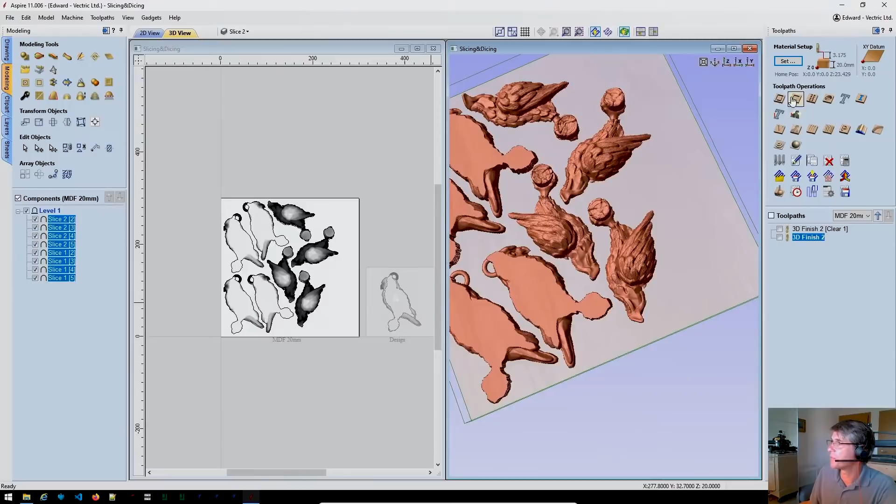So I'm just going to also add, for the purposes of completing the demo, a profile toolpath, and this is where I did need those vector boundaries. I'll use an 1/8 end mill again. Right, so it's going to try and do 16 passes here. That's because we've got a 20mm block, and the step down for this end mill is obviously quite fine, so it's going to do small passes there. We definitely don't need 16 passes because we know that we've already cleared the material. So I'm actually going to set that to 1 pass at 20.

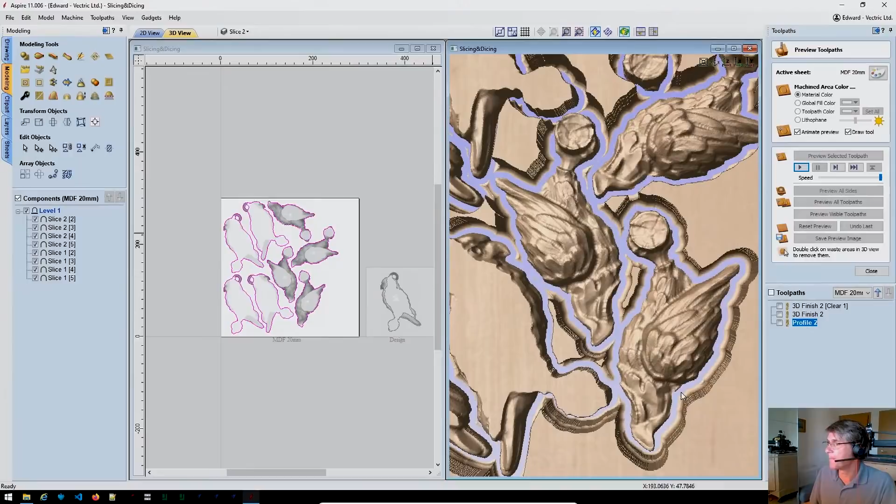Okay, and then I'm just going to OK that, and you can see we set that to 1 pass. You'll see in a second I'm safe to do that because we have already cleared the material with the ball nose tool, right? So I can just go down there. This is literally a clean up cutout pass, really, just so I can delete the waste material and you can get a feel for the finished results. Okay, so here we go. There's the actual parts.

Hopefully you can see it's a really significant improvement in the workflow of doing this sort of job. So I've tried to whiz through lots of the new features. Again, they will all be covered in more detail over the next 3 days. But what hopefully you're seeing is that they are bringing together this much more coherent way of dealing with the manufacturing space as opposed to the design space, and being able to use your design to manufacture in different ways within one file without one thing ruining the layout of the other thing, which previously, with only one sheet, has been really difficult to do.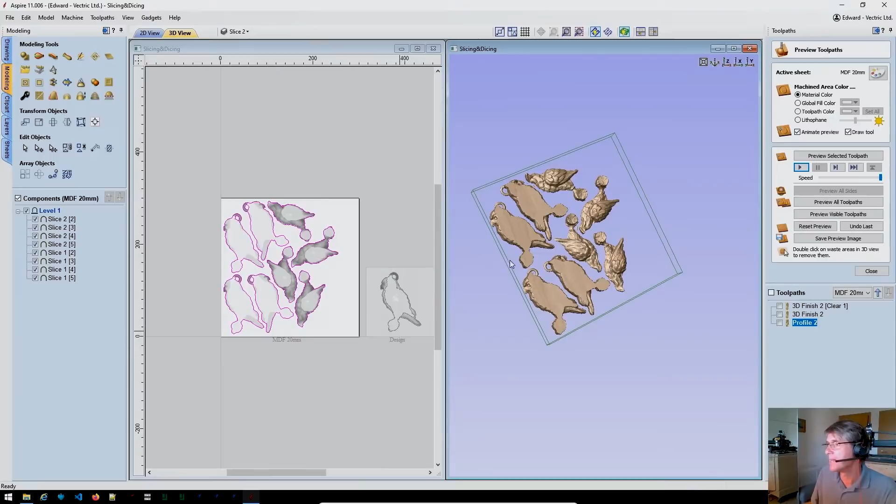Okay, so that is the basic layout. There's a couple more things to say. One is that potentially you could have done this as a two-sided part. If you did, you will also find there's some new features there that allow you to swap sides, which is a really neat improvement. It used to be pretty laborious if you'd created something on one side and you actually wanted the top surface to be the bottom surface or vice versa. Now we've sorted it all out for you, so you can swap the top for the bottom and vice versa very easily. But more importantly, the imported model here was quite crude, if you remember.

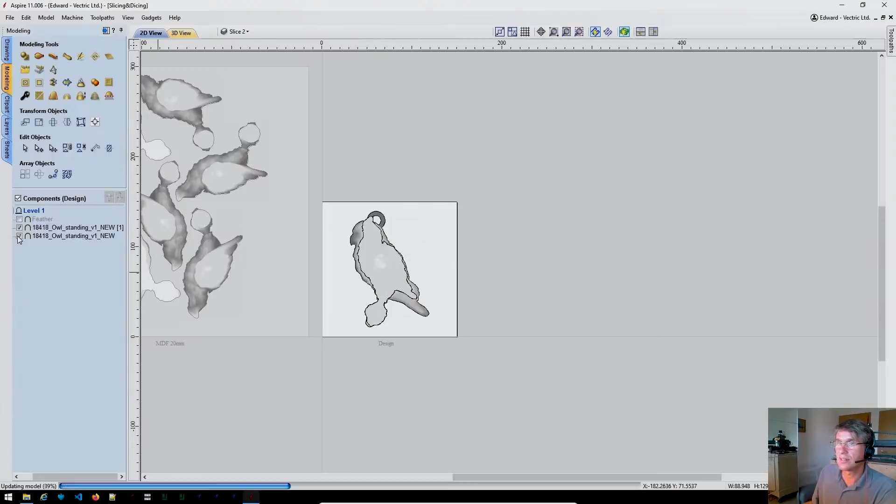So let's go back from our laid out design space here, and let's close this toolpath down and have a look at this model again. In fact, what I'll do is go back to 2D view, select this, and so this is the original model that we imported, and I need to get rid of the fact that I've got the preview up, so let's go to that. Okay, so this is the original model we imported.

Now, here's the important problem that I mentioned right at the beginning. There's a lot of undercut, potentially, that this model originally had that we can't get on our CNC machine. Our machine can only machine it from above. And so the model as it is has loads of areas that are inaccessible to our CNC machine. And the final result, therefore, is going to have some parts of it which are basically quite tricky for us to finish, or indeed they're just missing because they are shadowed effectively by material above them.

But the model does have this stuff, right? And if we could just break the model up into some smaller parts and lay different parts of the model at different orientations, we could probably solve this problem. And that's what we've been able to do in the latest version. And to get there, another interesting thing we've been able to add is when you've imported any model, if the original mesh file, the triangle mesh file that you imported, is still on disk in the same location, we store the path to that and we store the settings that were used for the import with the imported component.

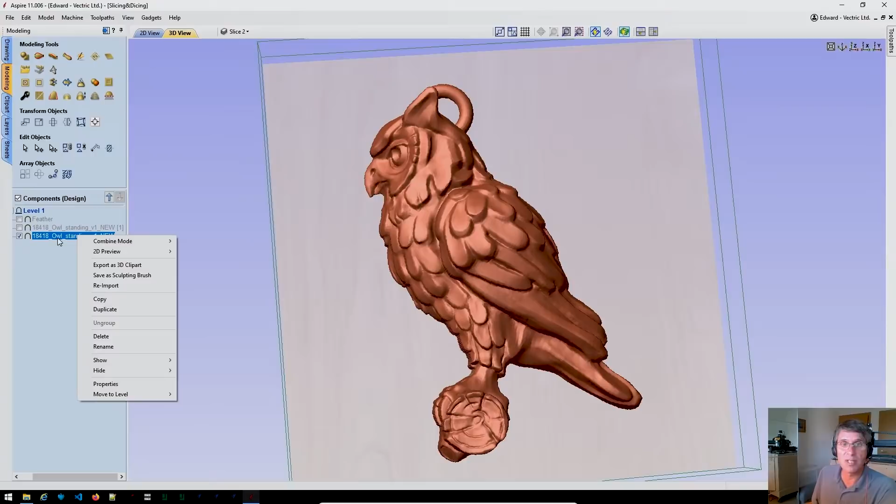And so that means that even now, coming back to this file, which I imported this model some days ago, because the original model is still on my disk and it's still in the same location, we have the option to re-import. And when I click that, it actually finds that model, it puts up the importing system, reapplies the settings that have been stored, and shows me exactly where I was at the moment where I clicked import before. Okay, and I can get back to that stage. So it's really a big time saver if you work with external models.

And now you can see in the external model, it does have all this information. It does have all this nicer finish here. The log is in fact not symmetrical. And obviously between his claws here is a lot more detail that we've simply lost because we can't machine it from this direction. So let's actually go back and have a look at this new form of the import model, which includes a new option here to segment the model.

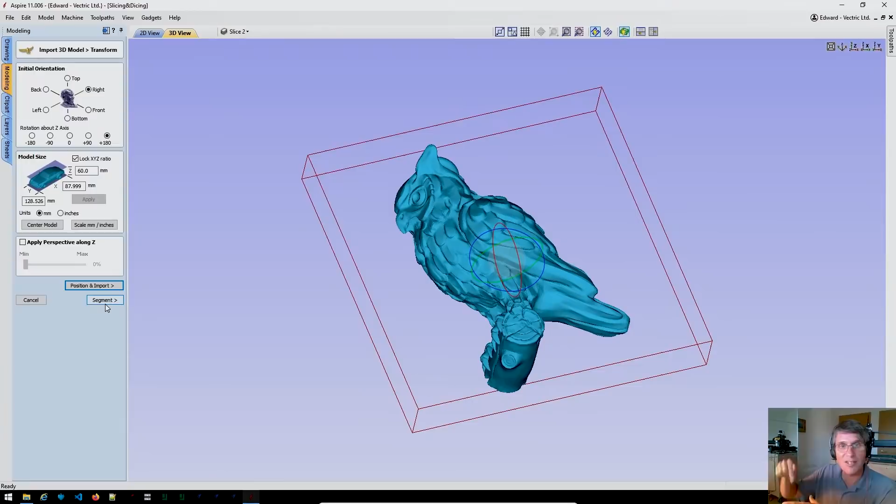And what that means is we can actually take the model and dissect it, if you like, first, and then lay out the dissected parts of this model as if they were independent models. And this means we can adjust the orientation of independent parts of the model to best suit the 3-axis machining profile of our cutters. Okay, so in this case, for example, what I can do is cut his feet off.

Sad as that sounds, I can cut his feet off, but it does mean I'll be able to access this part of the model in a completely different orientation from the top. So let's go ahead and do that. So instead of position and import, which is essentially the old approach for quick and dirty models which don't have undercut issues, continue to use that, it's super fast. I'm going to use the now much more sophisticated but really powerful segmenting process.

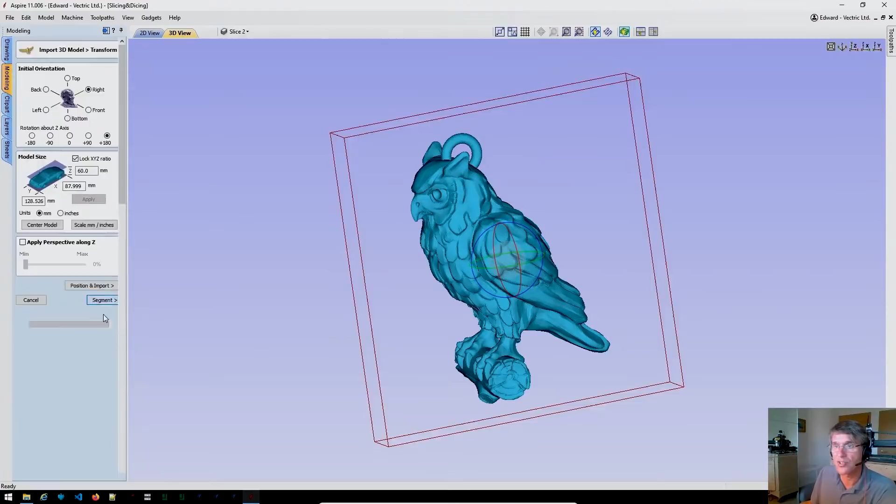So when I come into the segmenting tool, I can see here essentially that I've got a slice already through, and I can adjust that slice dynamically in the 3D view using this arcball and this positioning arrow. I can also adjust the values up here, so I can do a little bit of both. So first of all I'm going to rotate this slice around the x-axis here so that it's basically horizontal. I can get that exactly horizontal by typing a value of 90 in there, and then I can run it down to the ankle area of this bird.

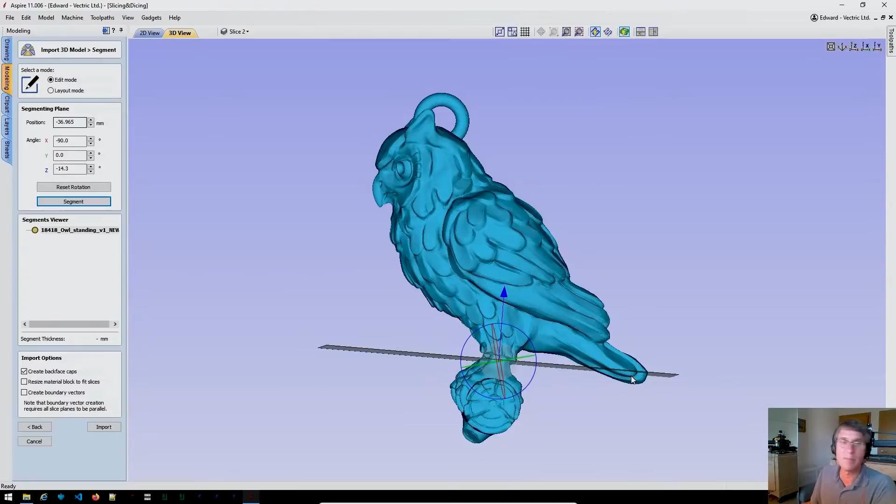Okay, and you can see as well that I can rotate it a little bit more round in Z here to try and capture just that bit. So I'm going to take a slice through his feet to take off the log. Notice I'm about to clip a little bit of his tail off as well, and I'll show you how we're going to sort that out in a second. But that's good. Let's just click the segment button. And down here you will see that we now have a model that's made up of two parts: the feet that I've sliced off and the bird.

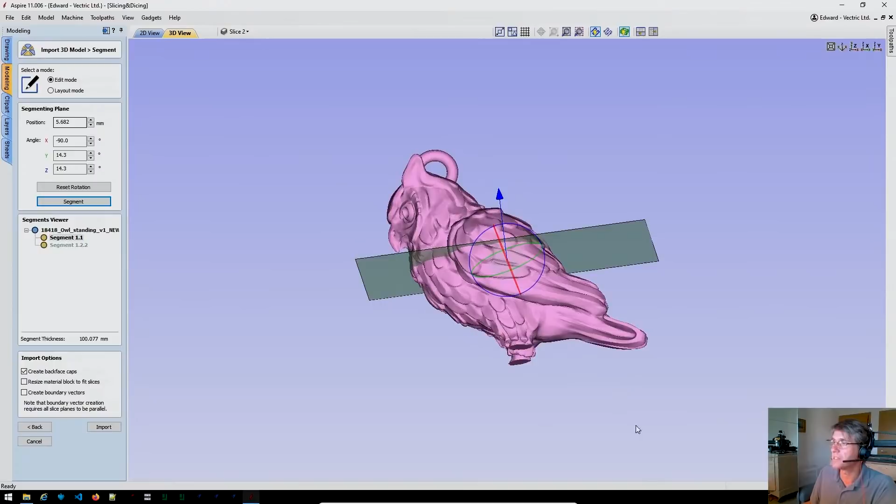Okay. The tail here is a pain, isn't it? Because really we don't need that bit to be part of the feet model. So it turns out you can rejoin bits back that you don't want, because we realized that this was a necessary part of the process. So the first thing I need to do is just separate that bit off, and I can just easily segment that away. So now I've got the tail and the feet separately, and then this tail I can just drag back up onto the original bird and it comes back on. Yeah, you see, so we rehealed it back on so that now we have the two parts that we genuinely want.

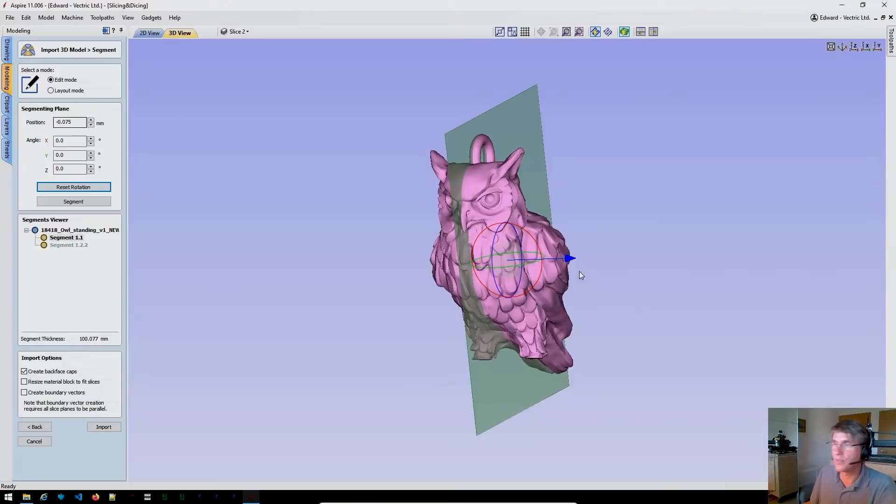Okay, so with the bird, I can just reset the rotation, because I'm going to slice him broadly the same way. If I was really keen now, I could slice him a little bit more to deal with this undercut and find different areas that were better. But again, I'll leave a more sophisticated demo of this to come later in the UGM. For now, I'm going to segment the two halves just as we did before. So now we've got our two halves just like we had before.

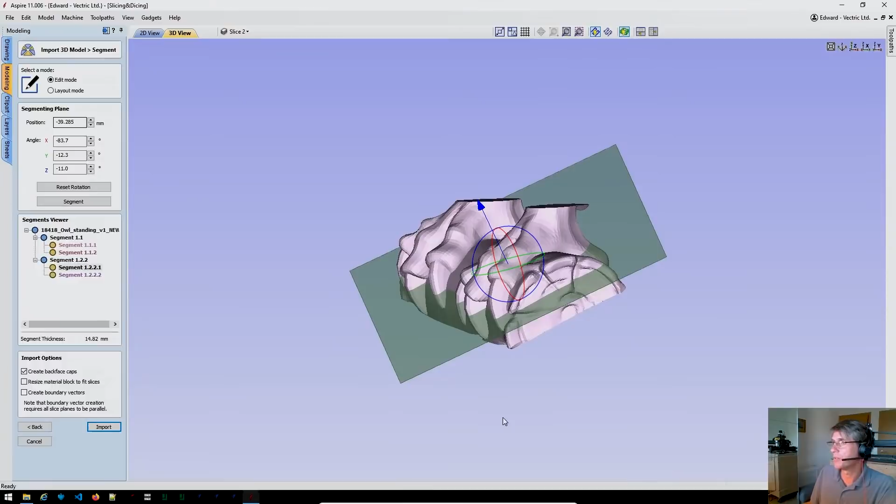And I'm going to take the feet, and this time round I can actually rotate my layer, not that way. Let's reset that. In fact, what I want to do in this case is rotate it round so that we're going to cut the claws off about here. So you can see here that the log now, I can get broadly two parts of that. So let's segment that, and let's just import the whole lot. I won't worry too much about the details. Obviously, it's going to be spread out a bit at the moment.

Now, in an ideal world, I would create another sheet here to do this. So let's do that. I'm going to add a new sheet here. Let's drag all these across. So we can move these to sheet 1, like so. And let's have a look at the parts all in situ. 3D view. Okay, so there you can see an alternative way of going. Now, obviously, we can slice this again to fit it into the 20mm block, but you can see already that the end result will capture way more of the original data from the model.

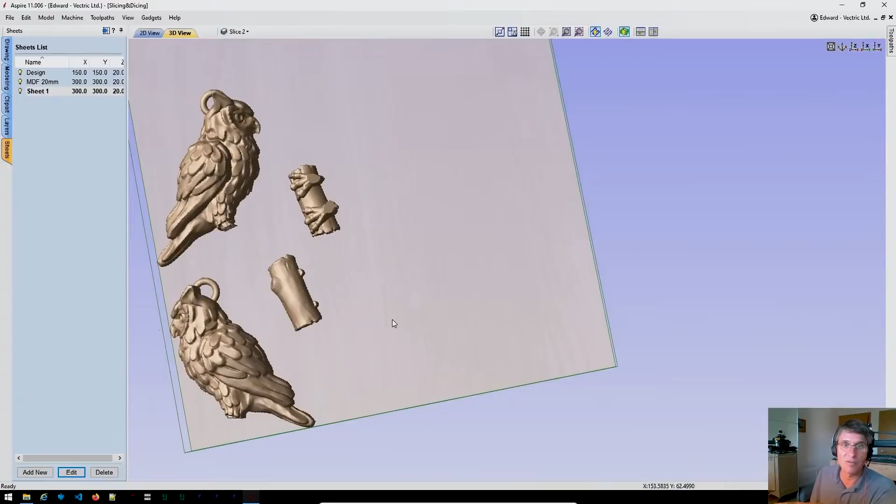So that's segmenting. There's a whole ton of stuff to be said about segmenting. I only want to highlight it in the context of 3D model manipulation at this point. Loads more to come in the UGM ahead, which I hope you will all enjoy. So that's my roundup of the what's new for now.